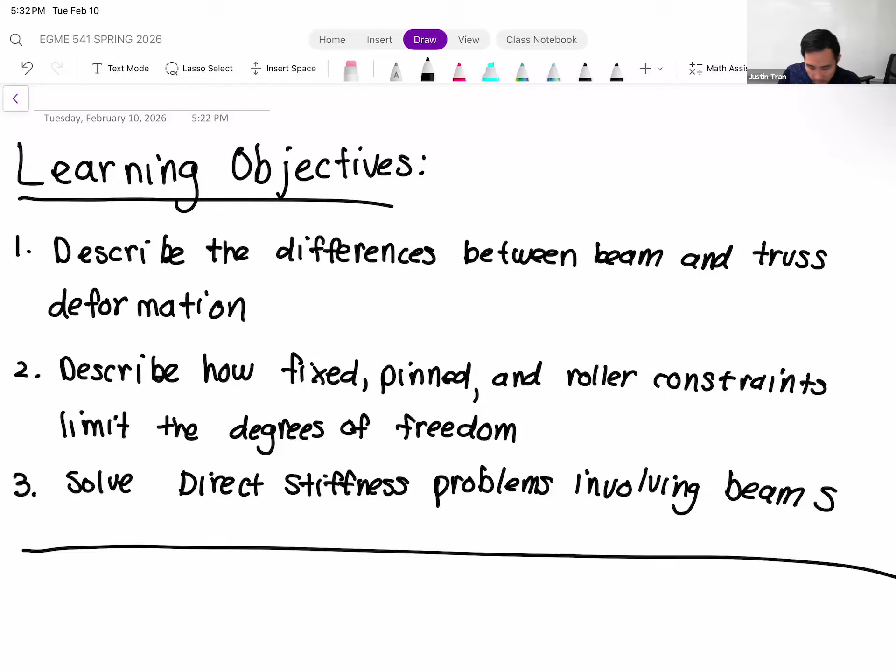Let's talk about beam equations. So far, we've introduced the direct stiffness method as a way to solve for the finite element solution to certain problems that have elements of a certain type. The types of elements we've gone over so far are springs and trusses.

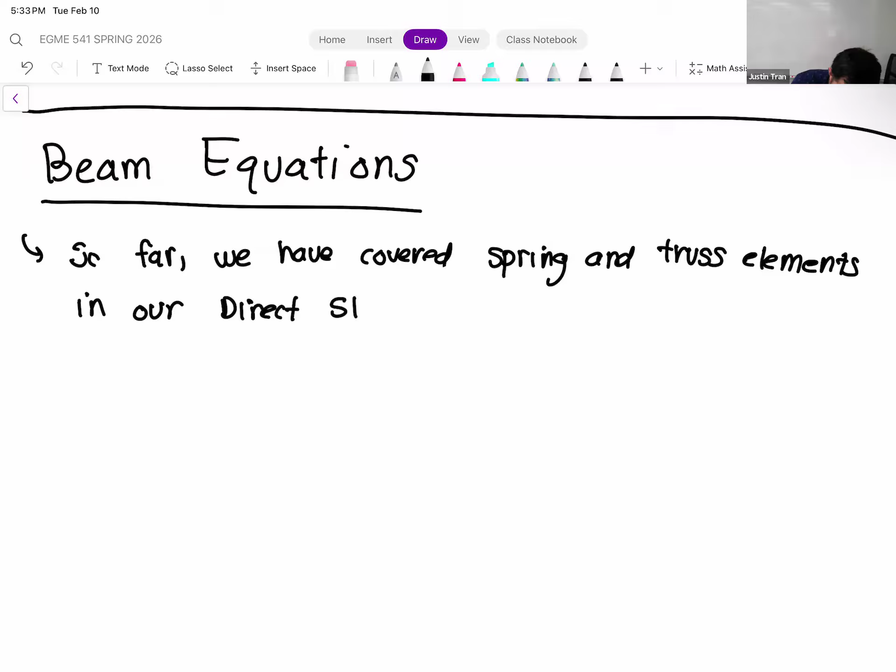It's almost not legitimate to call springs and trusses different elements because they're essentially the same. The only difference is the coefficient out in front. Springs and trusses share the exact same behavior in that we only consider axial deformation for these types of elements. You can draw a truss, you can draw a spring—essentially they're the same. We're only considering forces and deformations that go down the length of the element. So we call this axial deformation.

Other ways we've described this: springs and trusses can only support tension and compression, right? So basically any forces that are along the long axis of the element.

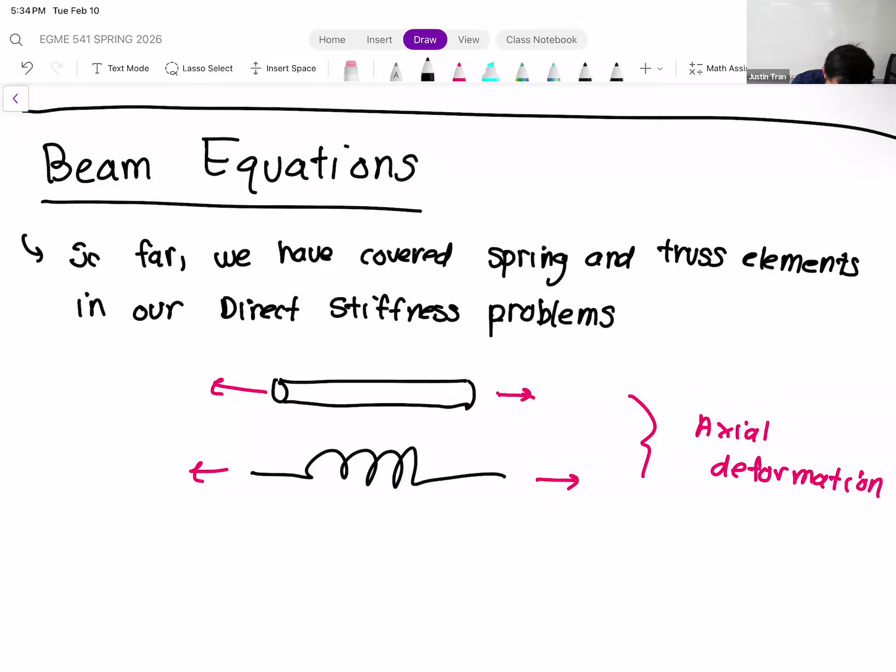Now, this is not the only way that structural elements can deform. We have situations where we have deformation that is perpendicular to the element. That's how we introduce beams. This will be the first time we're looking at situations where our deformation is not going in that particular direction.

Beams in particular support two types of degrees of freedom. The first type is what we call transverse deformation. And the other type is rotations.

Schematically it looks like this: we have an element here, it's a beam. Usually for beams, I'll draw it as a rectangle, and I won't draw the little circle for the cross section. That's a subtle thing, just personally what I do, but that's not a standard convention—just my own personal thing.

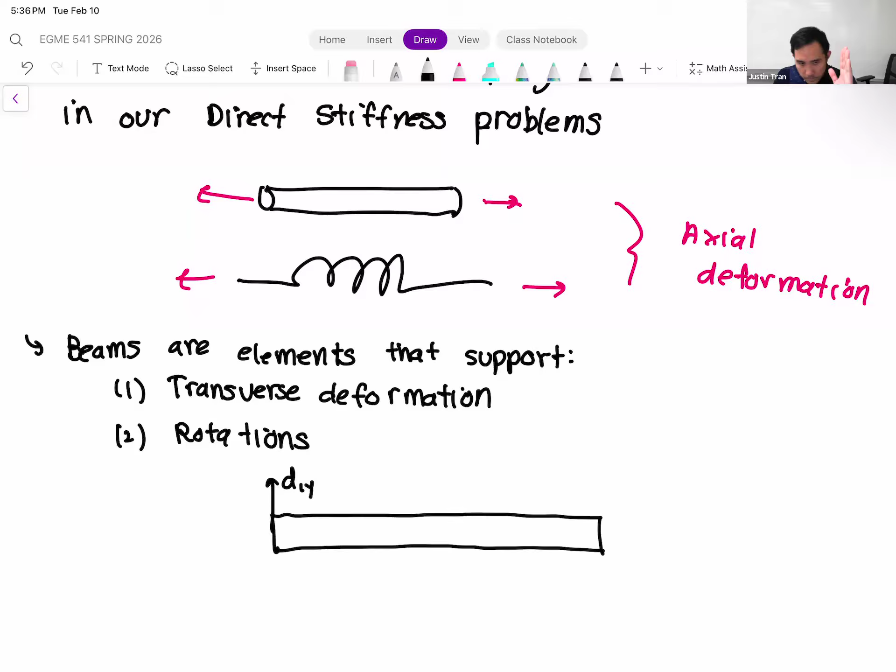Transverse deformations are deformations that are perpendicular to the length of the element. So for transverse deformations, we have D1Y, which is the deformation upwards on this element, and then D2Y, which is the transverse deformation on the other side of the element.

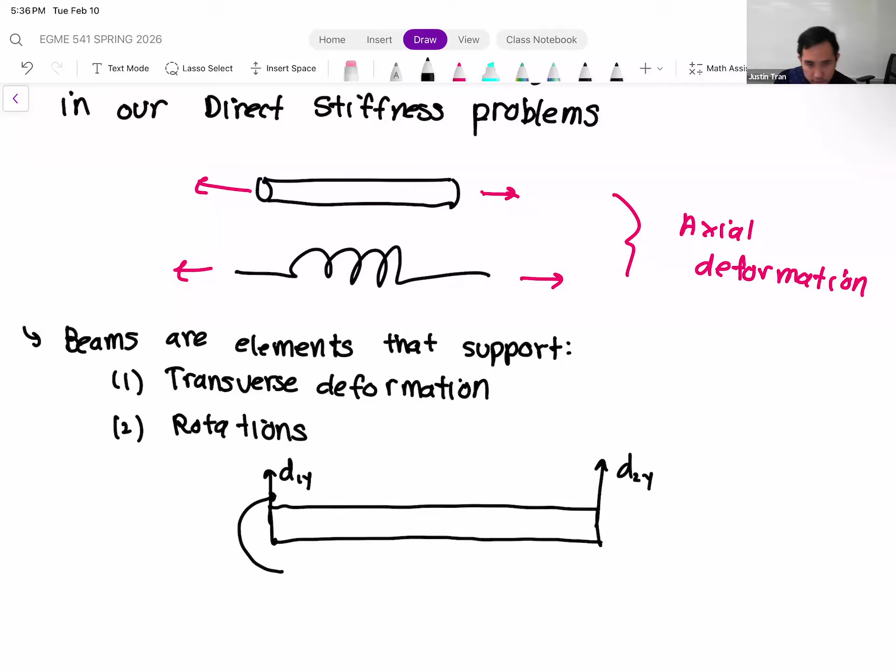The other thing we'll have is rotations. A rotation is basically just a change in orientation. Theta 1, theta 2 will be the rotation angles for our element at the two nodes.

With two types of degrees of freedom, two nodes per element, a beam is always going to have at least 4 degrees of freedom associated with it. I say at least 4 because this is for the plane case where our element is completely flat. But if you look at 2D beam problems where the beam is angled with respect to the horizontal, you have to cover both Cartesian deformation directions: D1x, D1y, D2x, D2y, just like we did with the trusses. But if you're looking at a perfectly flat beam, where the transverse deformations align with the y-axis—that's the standard position—then we have 4 degrees of freedom.

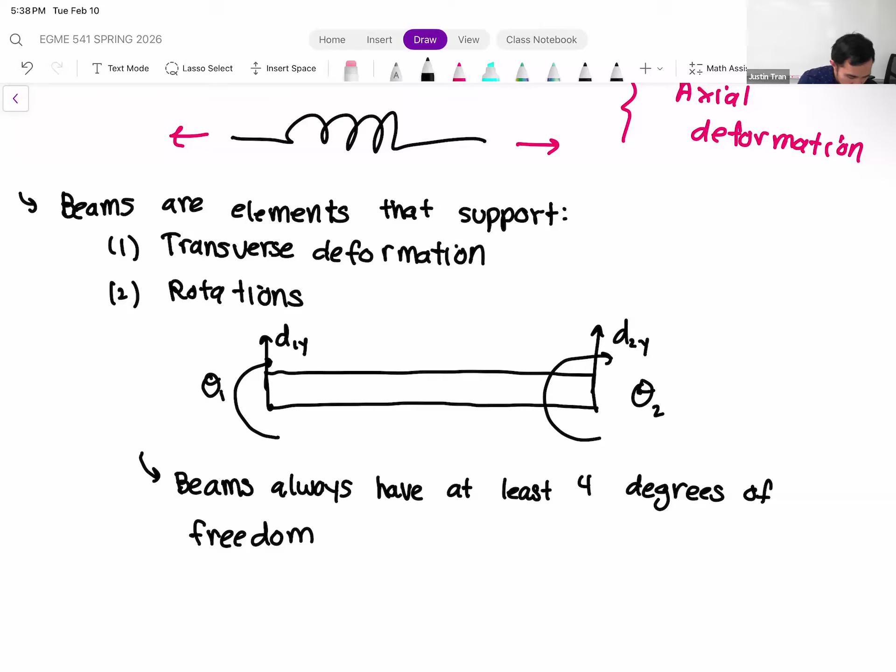So the first step we need to do, just like we saw with trusses and springs, is that we need the element stiffness matrix for beams. We can go through and derive the element stiffness matrix for a beam element, just like we did previously. That was what I had planned to do last Thursday, except we had the fire drill that prevented it, so I'll just put the highlights for the derivation here, but know that all the detail is in the lecture notes.

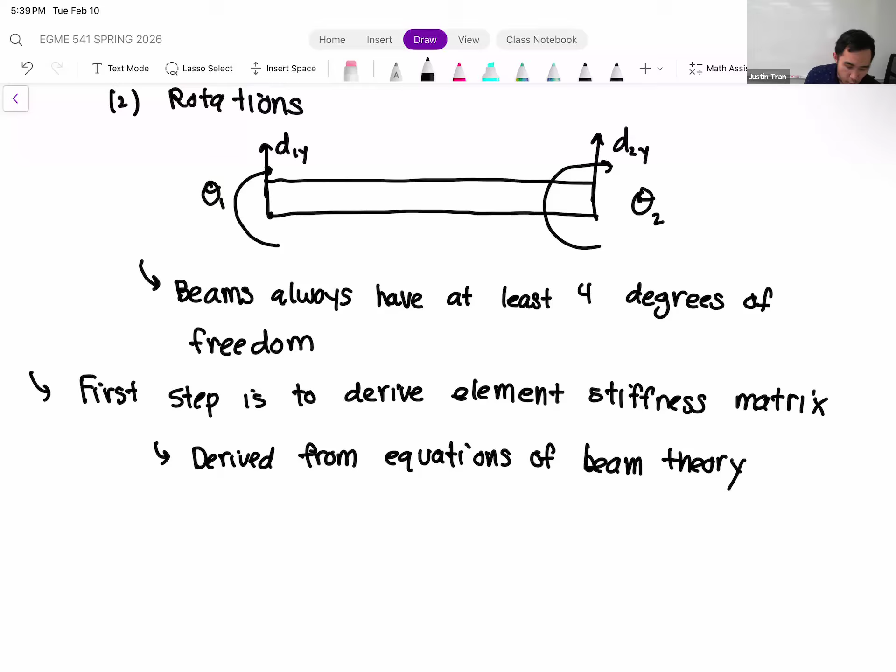Okay, so the derivation follows just as a natural consequence of beam theory. We start with basically an equation that describes the transverse deformation of a beam. That's E times I multiplied by d4y over dx to the fourth power. Right, so that's our beam equation there.

We did apply some assumptions here. We basically assumed that the E and the I are constants, and we also assume that there's no distributed loading, so there's no body force term.

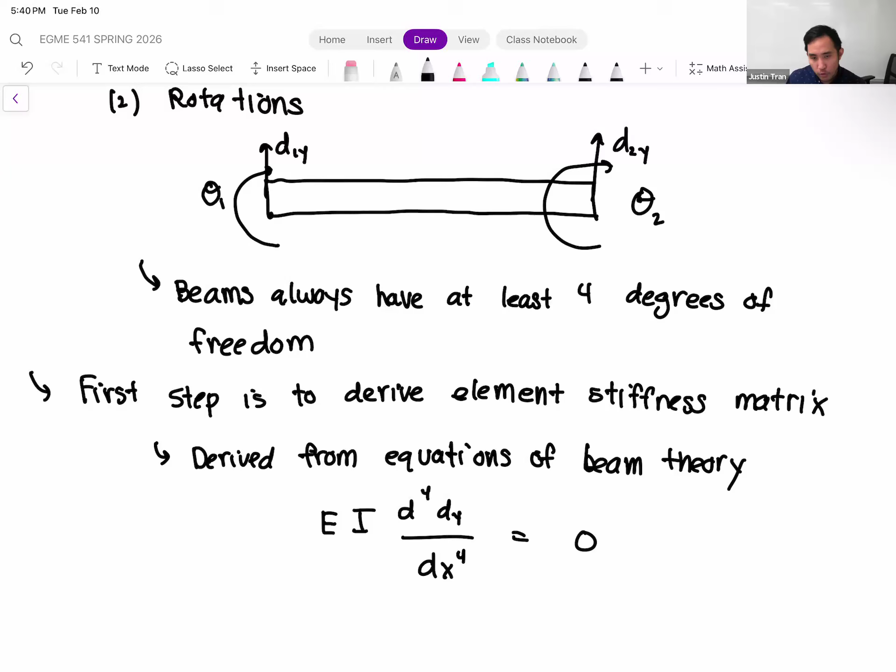So essentially what you do in the derivation is that you take this equation, you apply it to the beam, you set it equal to the nodal forces at each end, and from there you're able to get four linear equations. And those four linear equations form the four rows and columns of our element stiffness matrix.

Again, the details for this derivation are in the notes if you are interested, but I'm just going to go ahead and skip to the end so that we can start doing problems. So the end result is the following.

The first thing you're going to notice is that this element stiffness matrix is quite a bit more complicated than the element stiffness matrices we've done so far. And so these ones you kind of have to be really careful when you're plugging in values.

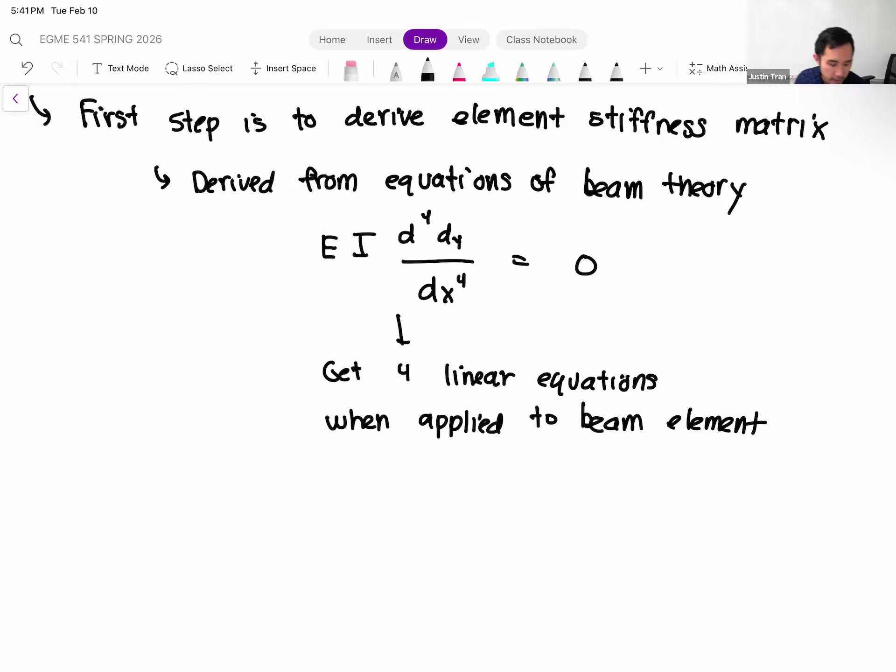All right, let me write out the matrix first, and then we'll define all of the terms. First thing we have is this coefficient out in front, which is E times I divided by L cubed.

And then to this, we're going to multiply by a 4x4 element stiffness matrix, since we have four degrees of freedom. Unfortunately, there's no easy way to do this, so let's just write it out. We have 12, 6L, minus 12, 6L.

One thing that is consistent here is that our element stiffness matrix is symmetric. And so just like we did with our 2D trusses, whenever you write a row, you can write those same values into the column as well. So we know our first column here is going to be 6L, minus 12, 6L.

Next, we have 4L squared, minus 6L, 2L squared, minus 6L, 2L squared. Then the last two rows, we have 12, minus 6L, minus 6L.

Question: do you need to know how to derive the equations for beam theory on the homework? There is a conceptual question about that, in terms of how you derive this, so I would definitely look at that in the notes. But the question is fairly straightforward. You should know, at least conceptually, some of the details of that derivation. That is on the current homework — homework 2 should have a conceptual question, I think it's the last one.

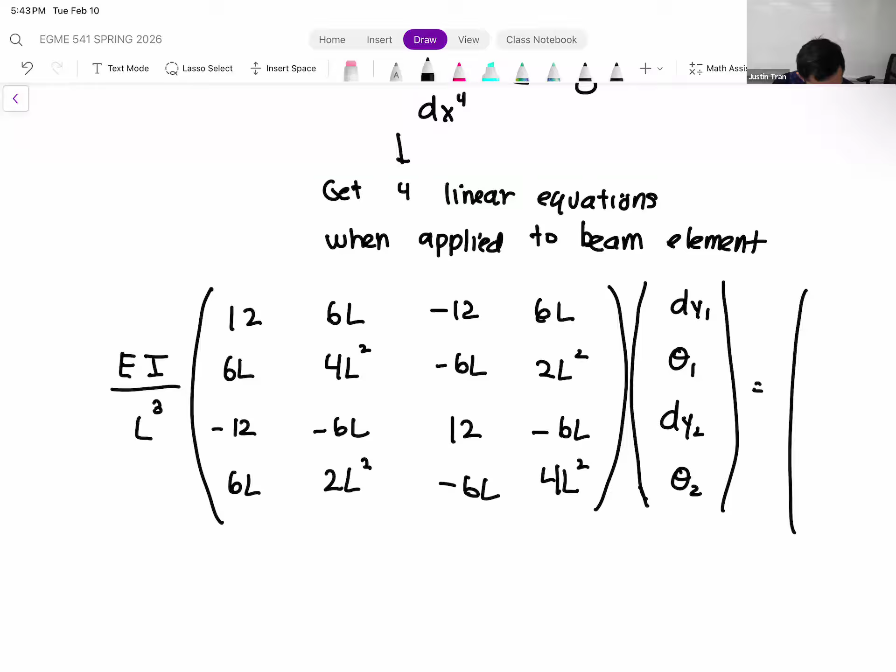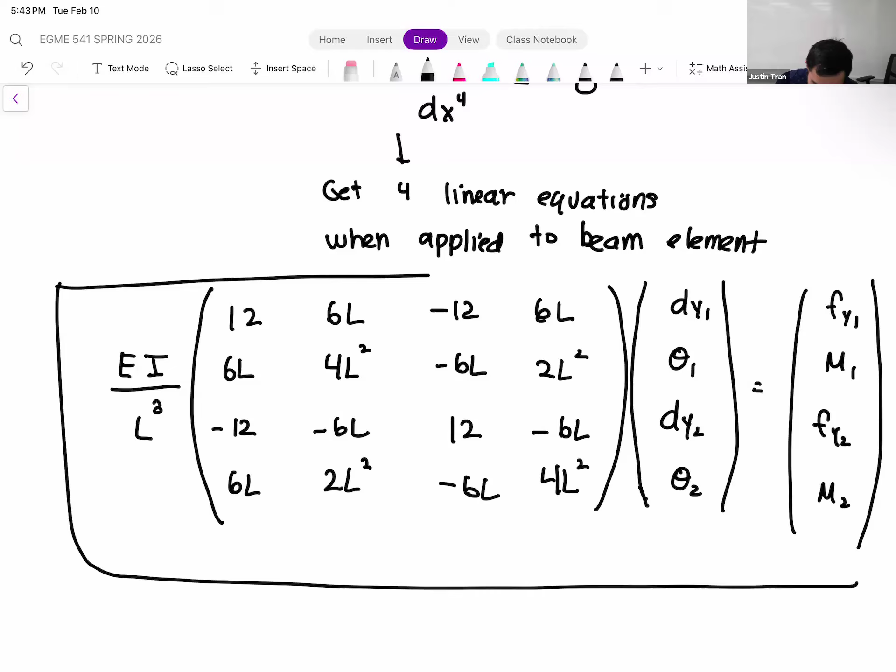Our degrees of freedom here are dy1, theta 1, dy2, theta 2. And this is equal to f y1, m1, f y2, m2. So this is our element stiffness matrix for a beam.

Let's go ahead and define these constants here, since there's quite a bunch of new variables we haven't seen before, along with some we have. E has the same definition as our truss element, so E represents the Young's modulus for this beam. Young's modulus is a property of the material, and it tells you how strong that material is at resisting general deformation. The higher the Young's modulus, the stiffer the material is.

L also has the same definition from our truss element, so L is just the length of the element. Next we have I — this is a new one. I here is the moment of inertia of the beam's cross section. All right, so that's all the material and geometric properties.

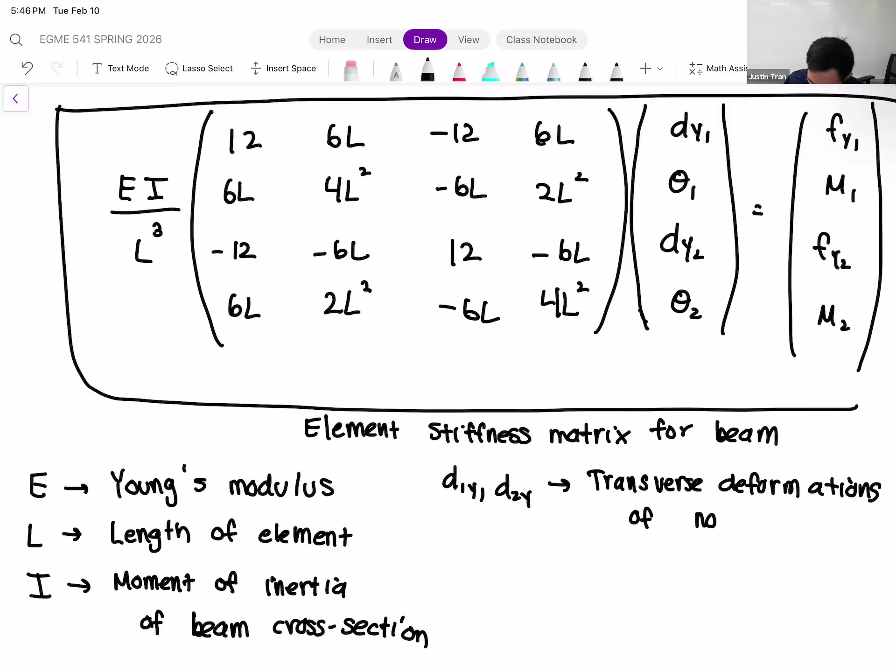Let's define everything in the solution vector and the forcing vector. d1y, d2y, these are the transverse deformations of our two nodes, node 1 and node 2. Next we have theta 1, theta 2, which represent the rotations of our two end nodes.

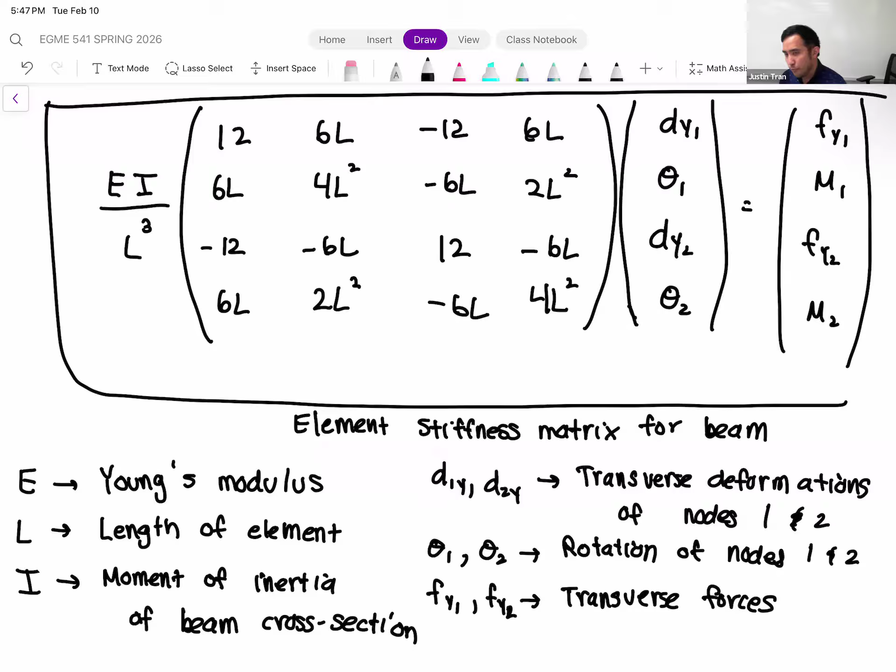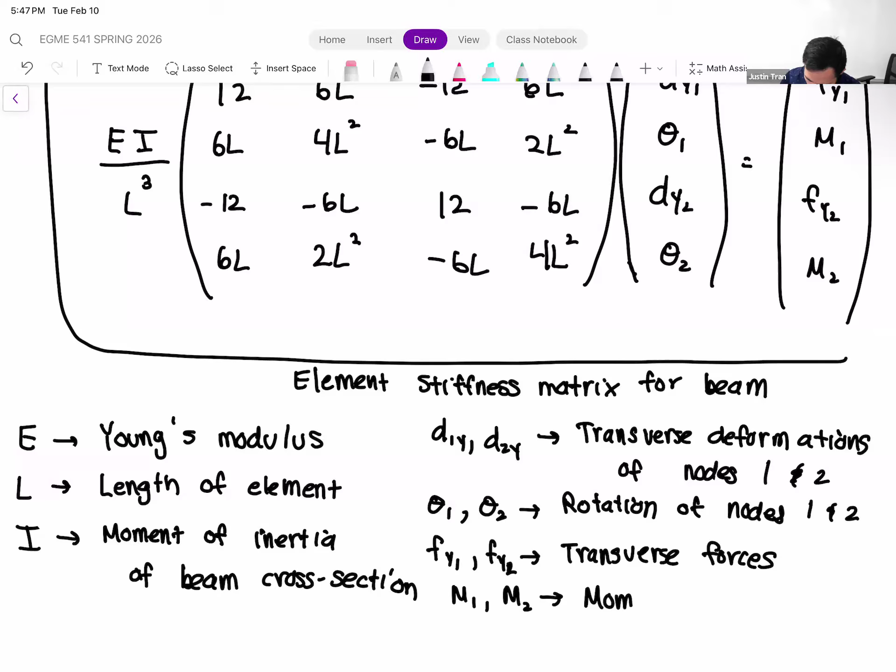Right, and then our forcing vector, let's define those. So Fy1, Fy2, these are the transverse forces that are being applied on the nodes, applied in the direction perpendicular to the element. And then M1, M2, these are moments that are applied on the two nodes, like a torque or something that's going to cause rotation.

So a lot of variables, and I know this matrix here - well, once you use it a few times, you start to see it in your dreams. But before that, it's a lot to memorize. So definitely have this handy. Any questions on this so far?

Okay, so before we jump into an example, let's talk a little more about constraints. Now that we've introduced this idea of a rotational constraint or rotational degree of freedom, there are certain constraints that will restrict that and certain constraints that will not.

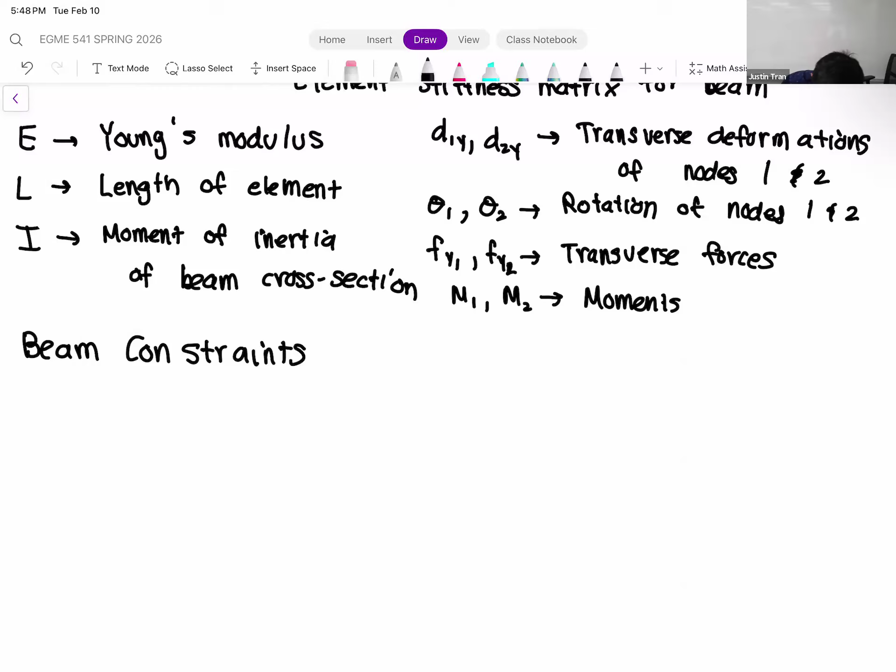Okay, so in general, so far there are three possible degrees of freedom that can occur at any given node. The first one that we've been using up until this point is axial deformation, which usually, for a coordinate system local to the element, is in the x direction. So dx - I guess technically that's dx hat.

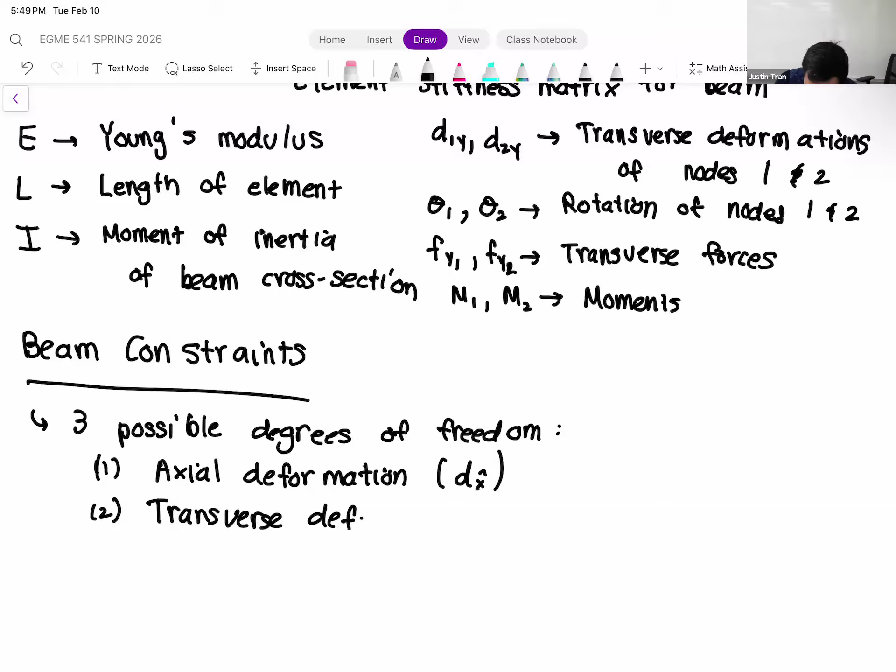Next, we have transverse deformation, so that's dy hat. That's the new one - that's the one that we've just learned. And then the third is, of course, rotations.

Interestingly, rotations are kind of independent of the coordinate system, because rotations are unitless. So it's not something that depends on the coordinate system or any degree of measurement. So rotations are just going to be theta.

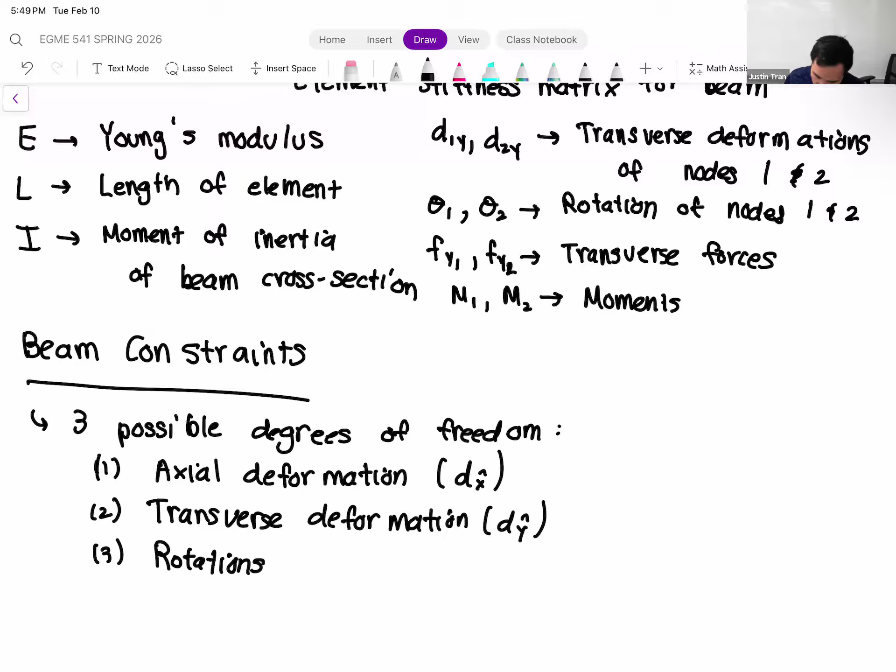Now, we can apply different types of constraints to restrain these degrees of freedom. In general, there are three types of constraints that we can use.

So the first type of constraint that we have is what's called a fixed support. A fixed support is the strongest type of constraint you can have. In a fixed support, all of our degrees of freedom are going to be constrained.

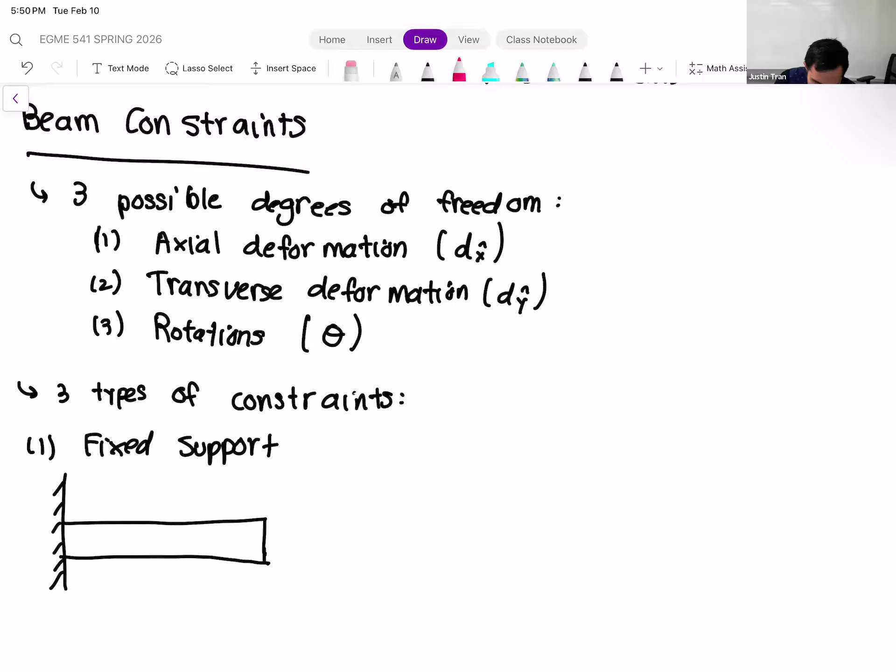Schematically, it looks something like this: you have some wall, and a beam coming out of it. The fact that this beam is basically attached to this wall, that is our fixed support. And so under a fixed support, dx hat, our axial deformation, is going to be 0. Our transverse deformation is going to be 0. And theta, our rotation, is also going to be 0. So a fixed support constrains all 3 degrees of freedom.

All right, so next one we have is a pin support. This is one that we've mostly been using just because we haven't considered rotations up until this point. For a pin support, it usually looks something like this: you have an element and basically a little pin there that's pinning it, and then the pin itself is fixed to the ground.

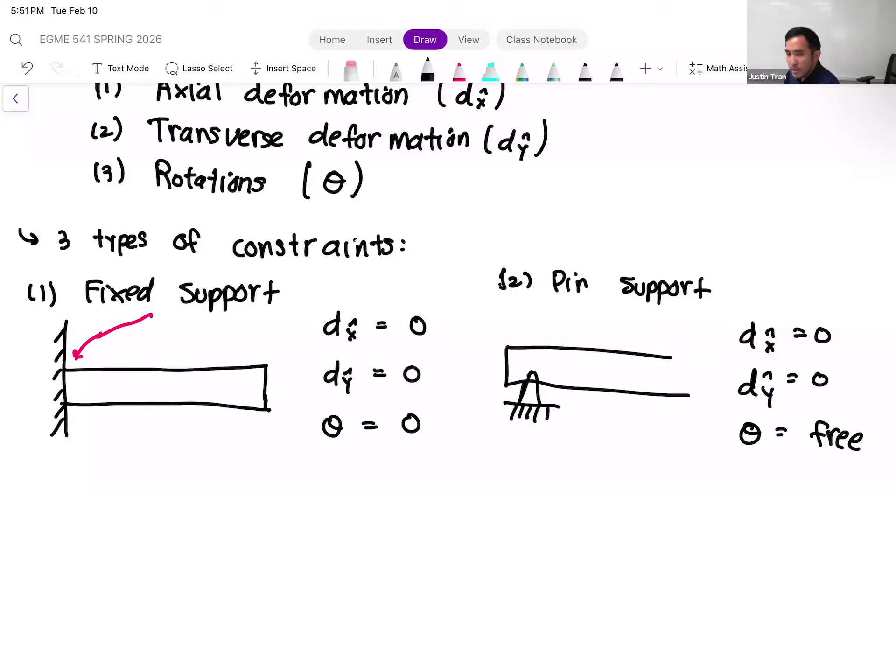Now under a pin support, both of the deformation components will be 0. So dx hat is equal to 0, dy hat is equal to 0. But our rotation is going to be free, right? Because it's a pin, what we're saying is that the element there, even though it can't translate, can't move from that spot, it can at least change orientation, change direction. So our theta is going to be free.

And then finally, we have a roller support. This is one we just introduced last time. So under a roller support, we have basically a pin that's attached to the element that's on wheels. The roller support only constrains deformation that's perpendicular to the ground.

So if we say that the x direction is along the length of the element, that means dx hat - there's no restrictions on this just because it can roll in that direction. So we say dx hat is free. dy hat is 0, so the transverse deformation is constrained because of the roller. And then our rotation is free as well, because the roller is kind of just like a twist on the pin support - the element is free to rotate and change angle at the roller support.

All right, so starting with these beam problems, you'll see a combination of these types of constraints in your problems. So when you go to apply the boundary conditions to your global linear system, you want to make sure that you don't accidentally knock out a row that's not supposed to be knocked out. Definitely be aware of the type of constraints you're using and what effect that has on your matrix.

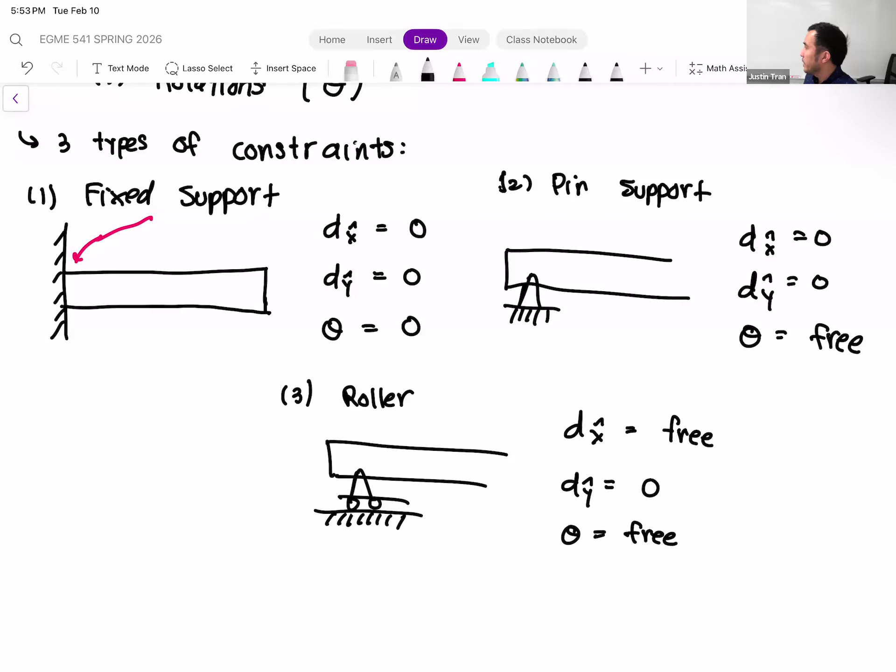All right, any questions on this?

All right, so besides that, that's all the new information about beams. We have our new element stiffness matrix, and these new constraints. From here, solving these FEA problems with beams is the exact same process as before. The only difference is that we have a different element stiffness matrix. All right, let's do a quick example.

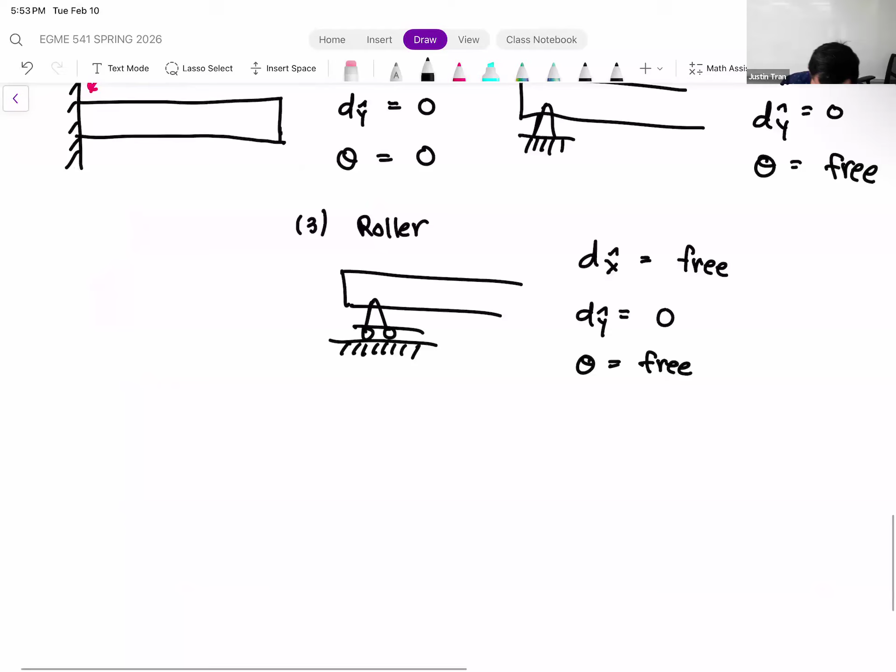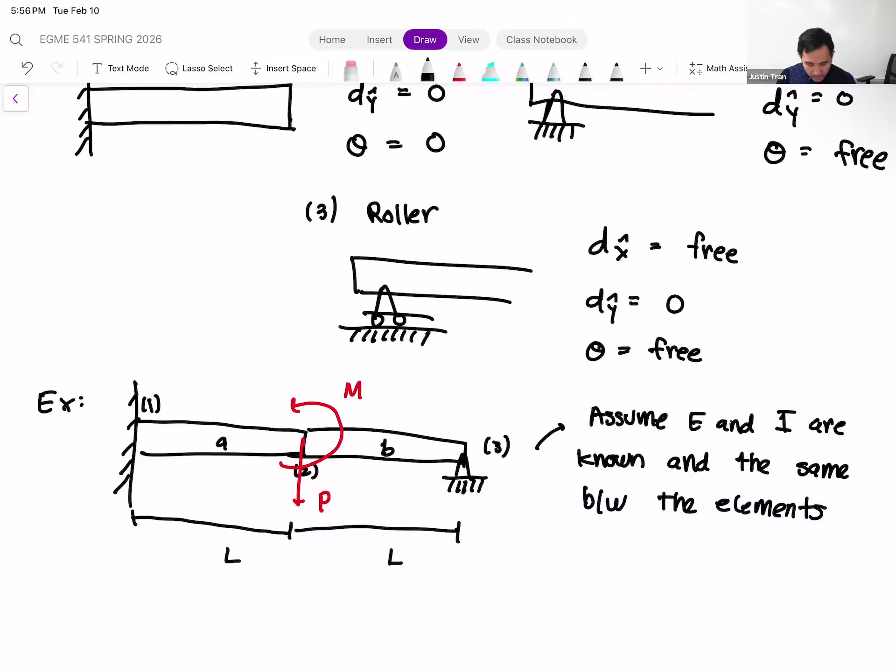And so knowing that elements A and B here are beams, all we can do in this problem, since we don't have any numbers, is set up the global linear system.

All right, so fairly standard finite element problem. We're not given any numbers, so we're just going to do the whole thing with symbols. We're going to go fairly quickly. Any questions just on the setup of the problem? All right, let's go ahead and get started.

So just like any finite element problem, we are going to start with the element stiffness matrices. Luckily elements A and B are exactly the same, or at least they have the same properties, the same length, the same Young's modulus, the same I. And so numerically, the two element stiffness matrices will be the same. But remember, each element stiffness matrix is connected to different nodes, and we want to make sure we note that as well.

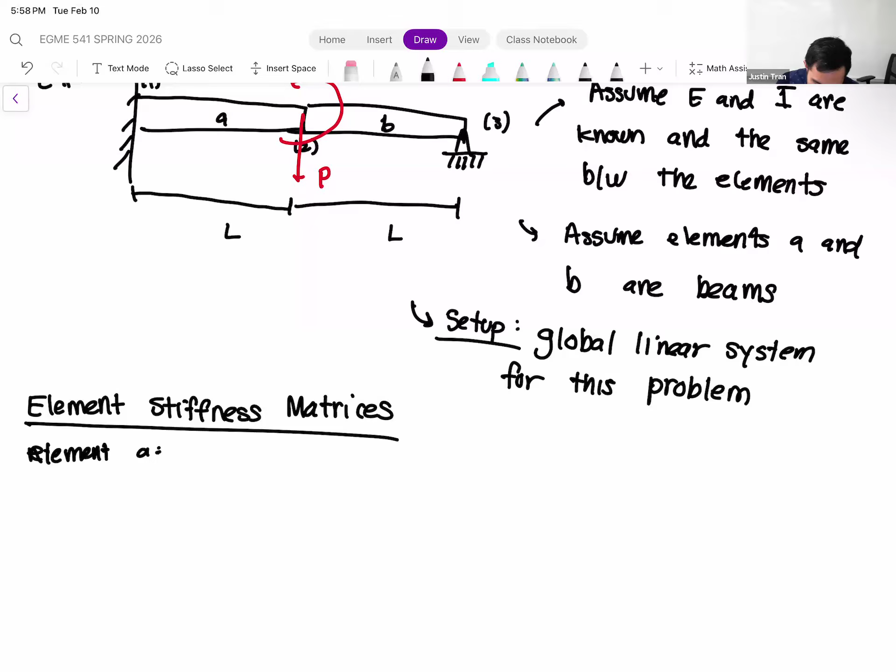Let's look at element A. So we have just a generic beam, oriented the right way, and we know all the properties. Let's go ahead and write out the element stiffness matrix: that's E times I divided by L cubed, multiplied by the matrix with rows 12, 6L, minus 12, 6L; 6L, 4L squared, minus 6L, 2L squared; minus 12, minus 6L, 12, minus 6L; 6L, 2L squared, minus 6L, 4L squared.

Element A we know is connected to nodes 1 and 2, so we're going to factor that into our solution vector here: d1y, theta 1, d2y, theta 2. It's a little anticlimactic since we don't have any numbers to plug in, but in some ways this is good for our first problem, just to see the process.

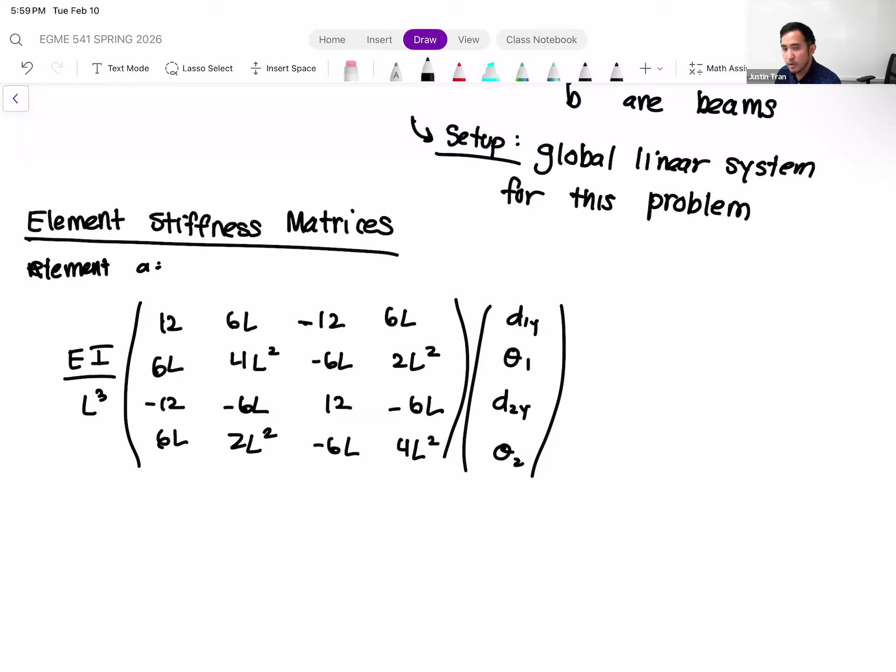Okay, so let's do the same thing for element B. Element B will have the exact same matrix. The only difference is that element B is connected to nodes 2 and 3 as opposed to 1 and 2.

All right, I'm just going to write this one fairly quickly. So we have 12, 6L, minus 12, 6L; 6L, 4L squared, minus 6L, 2L squared; minus 12, minus 6L, 12, minus 6L; 6L, 2L squared, minus 6L, 4L squared. And element B we know is connected to nodes 2 and 3, so let's make note of that as well: it's going to be D2Y, theta 2, D3Y, theta 3.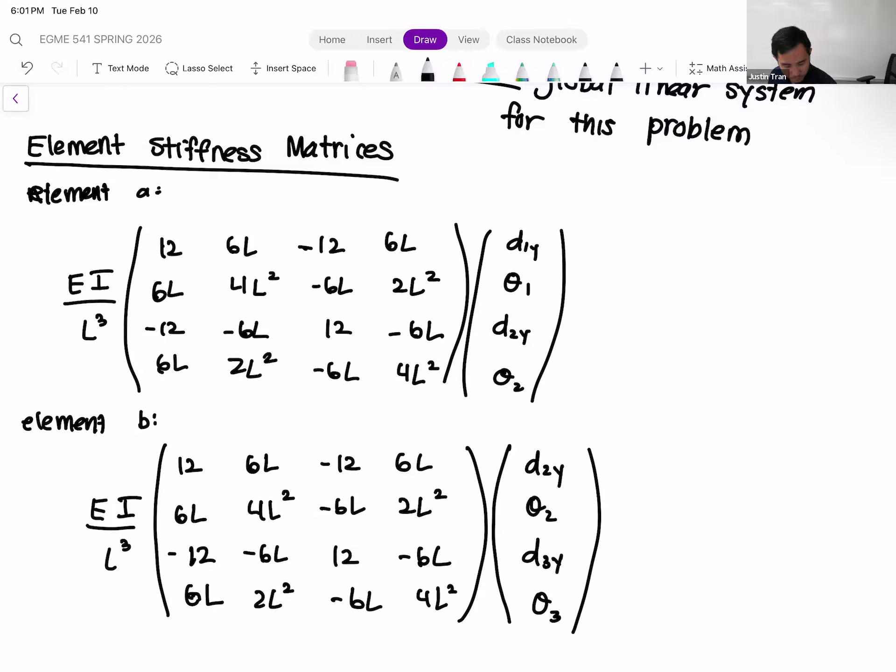Okay, so fairly straightforward. All we've done is taken our formula for the element stiffness matrix and just moved it down here, since we don't have any numbers just yet. Our next example will have numbers, but for now we're just doing one without the numbers. Any questions on this so far?

Okay, so now that we have our element stiffness matrices, we are ready to assemble. So let's go ahead and do that.

So for assembly, we have EI over L cubed. Since both elements are the same, I'm just going to factor out that same quantity just so we don't have to worry about it.

Our global linear system here will be 6 by 6. Let me go ahead and write the columns in: D1Y, theta 1, D2Y, theta 2, D3Y, theta 3. And then rows, we have D1Y, theta 1, D2Y, theta 2, D3Y, theta 3. And then out here we have F1Y, M1, F2Y, M2, F3Y, M3.

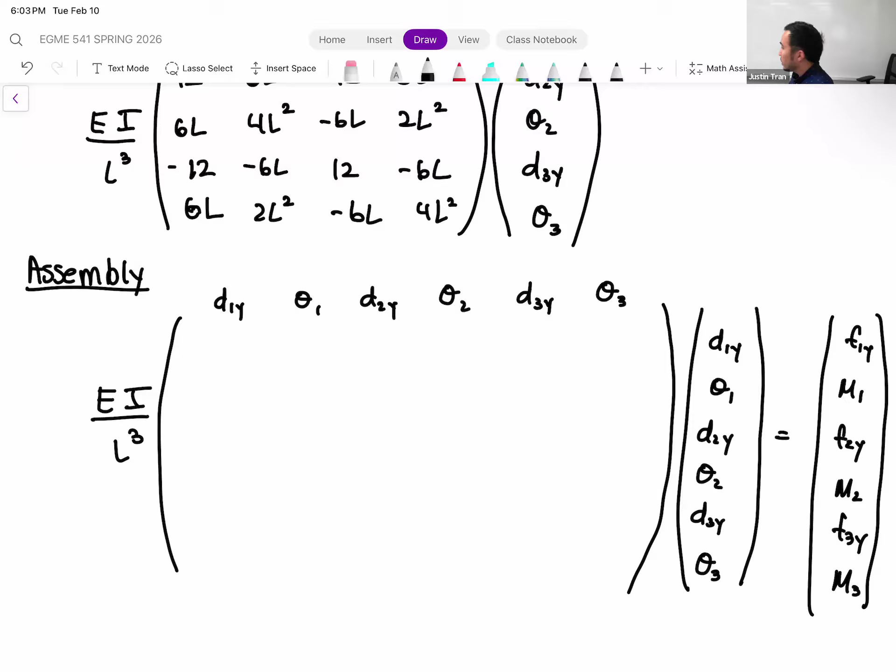So now that we have our global linear system set up, we can go ahead and start plugging in our element stiffness matrices. Luckily, our element stiffness matrices here are pretty straightforward, so they all are just using consecutive nodes here.

Element A will be nodes 1 and 2. So element A is going to be this region right here. That's element A, nodes 1 and 2.

And then element B we know is nodes 2 and 3. Let's go ahead and block those off. That'll be that region right there.

First thing we'll do is, any regions that do not have a box around them, we'll go ahead and put zeros there. So we're going to have zeros in the rows and columns where nodes 1 and 3 interact, that's the D1Y, D3Y row, D1Y, theta 3 row. That makes sense because there's no element connecting nodes 1 and 3, so there's no way for those two nodes to interact, and it makes sense that we have 0 there.

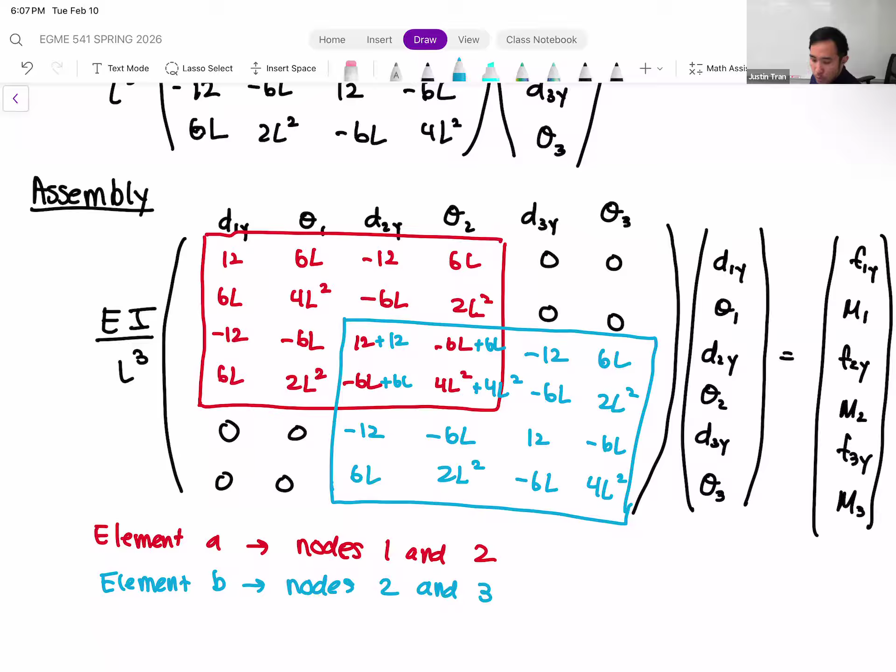In two cases, you see that we have an increase in the magnitude of the entries there, so those are our two diagonal terms. We have a 12 plus 12, which is going to be equal to 24. And then in the bottom right, we have a 4L squared plus 4L squared, that's going to combine to 8L squared.

And then in the off diagonal entries, we have minus 6L plus 6L in both of those, and so that's going to cancel out and give us zeros on that. Okay, so that is our assembly, same process that we've gone over, just with different element types now. Any questions on how we've assembled this matrix here?

Okay, and so the last step we have here is we're going to apply the boundary conditions. This part is kind of the new part, and that's the whole reason we're going through this example. Let's go back up to our problem and make note of the types of boundary conditions we have on our two nodes. If we look at the constraints first...

We see that node 1 is fixed to the wall. Remember what a fixed support means: a fixed support essentially means that all degrees of freedom at that node are going to be knocked out. So that means that at node 1, D1Y is equal to 0, theta 1 is equal to 0.

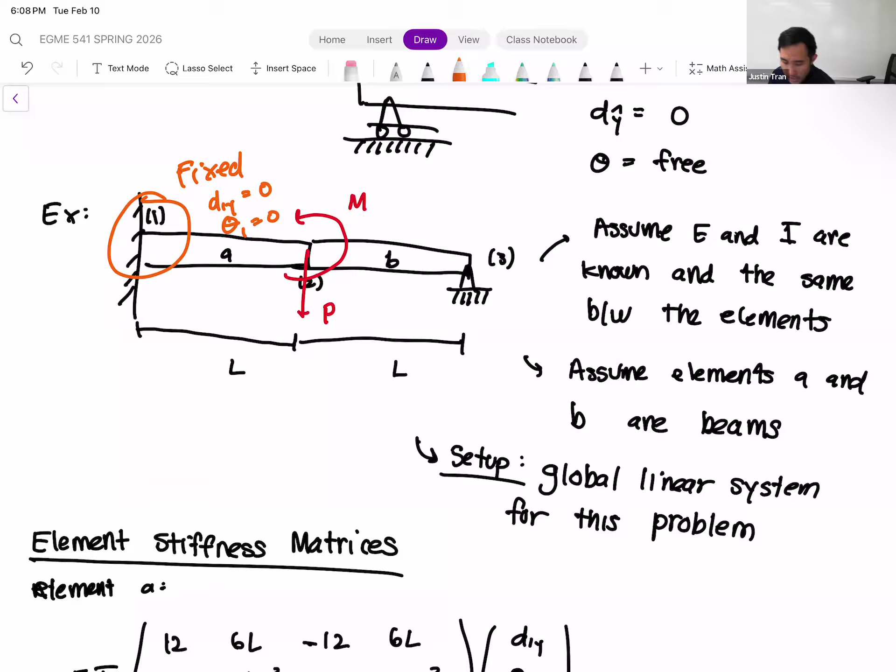On the rightmost node, we have a pin support. That means d3y is equal to 0. But since it's a pin, we know that the rotation at node 3 is going to be free. So we're not going to constrain theta 3, we're only going to constrain d3y.

So let's go back to our matrix and see that happen. First we're going to apply the fixed support on node 1. That's going to knock out the first two rows. Just like we always do with Dirichlet type boundary conditions, we substitute those rows entirely with zeros, with the exception of the diagonal term, where we put a 1. And in the forcing vector, we put zeros on those rows as well. Effectively, we're putting in the equations d1y equal to 0 and theta 1 equal to 0 from those first two rows.

And then the other constraint we're applying is on node 3, on d3y. Let's go ahead and do the same thing: eliminate that row, put zeros in the row except for the diagonal entry where we put a 1, and set f3y equal to 0 as well.

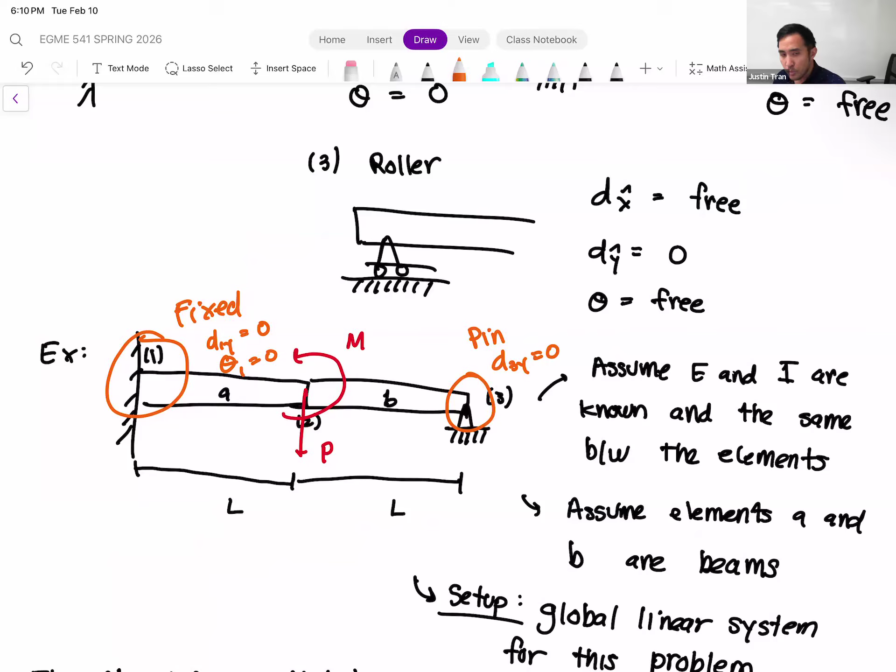The last two boundary conditions we're going to apply are our two loads. Both loads in this problem are applied at node 2: we have a downward force P applied at node 2, and a counterclockwise moment applied on node 2 as well. You have to be careful about the signs of these forces. First, the force being applied on node 2 is in the downward direction, so we apply that with a minus P in the row for d2y. We leave the matrix alone and only apply the force in the forcing vector. Then we have the force applied on the theta 2 degree of freedom, which is our moment m. Since it's counterclockwise, following the right-hand rule, counterclockwise is positive, so we have a positive m on that row.

Then the last thing we have to set is M3. We don't have any boundary conditions applied on the rotational component of node 3, so we can just set M3 equal to 0. But we leave the matrix alone on theta 3 since it's not constrained.

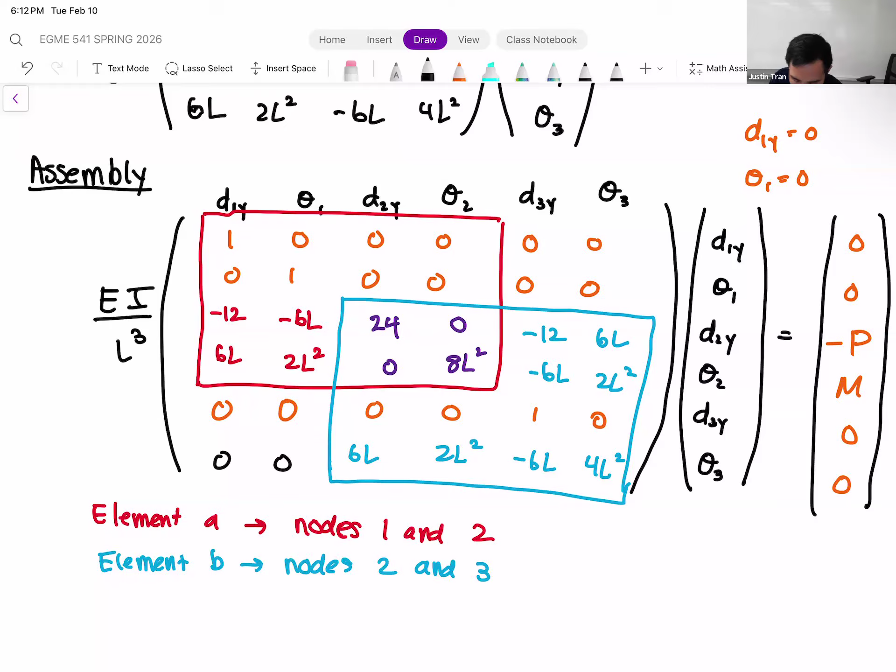With that, we are all set up, and this is our global linear system. If you actually wanted to solve for the deformations and rotations at the nodes, you'd have to plug in numbers and solve this system.

But you can see with beam elements, nothing really changes about our methodology. We're still using the exact same direct stiffness method, we're going to kind of beat it till it's a dead horse and then beat it some more. The only thing that's different here is the element stiffness matrices, which are of course different. Any questions on this example?

So that's our first example using beam elements. Before we move on to the next example, I want to talk about one other unique thing we can do, which is we can compute reaction forces on our beam elements.

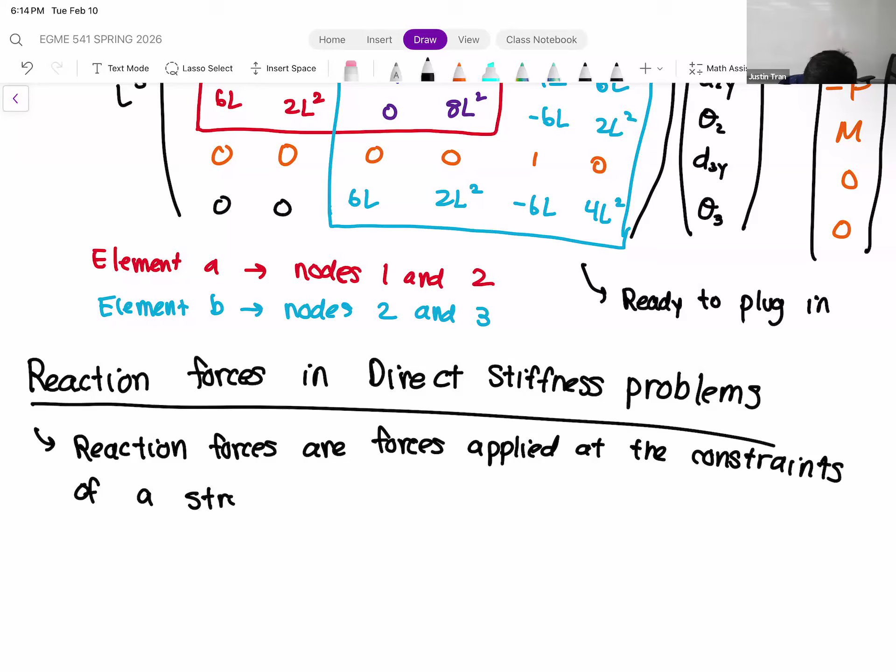So oftentimes, we don't explicitly compute the reaction forces. We basically just say that the constraints are doing its thing. But in reality, all forces have to be balanced out in order for a system to be in equilibrium. So what we don't see is that whenever you have a constraint, there is an implicit force being applied from the constraint onto the structure that's maintaining equilibrium.

So in other words, it's like this: let's say we have a simple cantilever beam, and we apply a load at the end of the beam. If we look at a problem like this, we can automatically say that this structure is in equilibrium because we have that fixed support on the left.

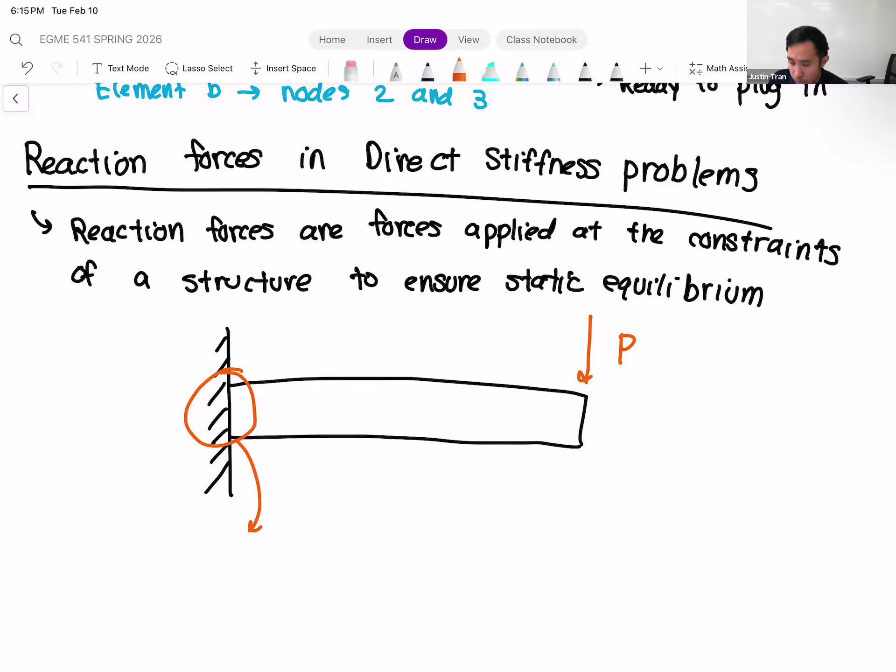But in reality, what that fixed support is actually doing is applying what's called a reaction force. So if we isolate this beam from the support, we basically just look at the beam by itself, and we have our force being applied at the end.

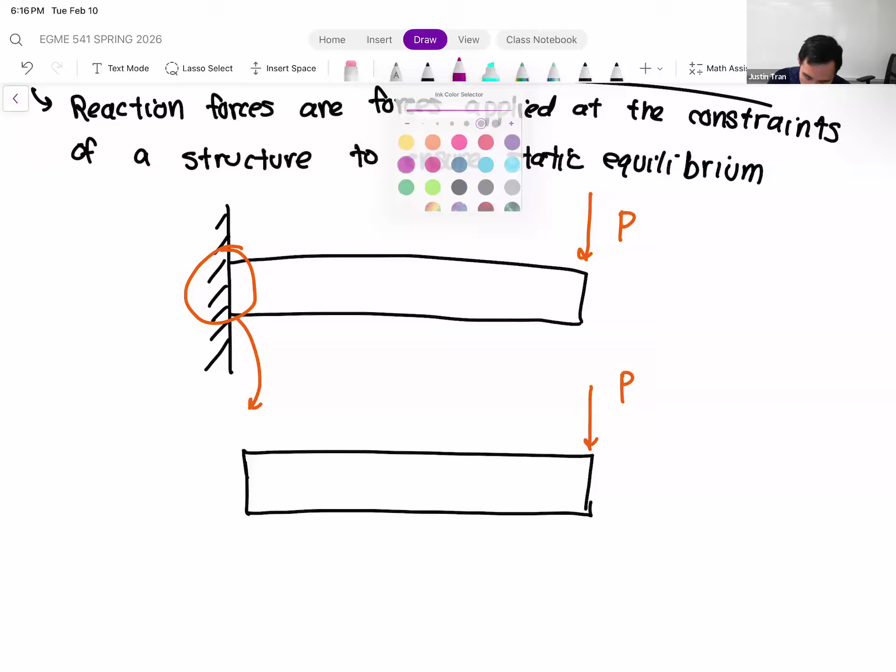If you have a structure in static equilibrium, it is not moving, which always means that all the forces being applied onto your structure, onto your system, have to cancel out. That means this P must have an equal and opposite reaction force in the structure in order to maintain equilibrium. That force is applied at the location of the constraint.

So we can define some Fy that is going to be that reaction force. And for beams too, we also can have a reaction moment, or reaction torque.

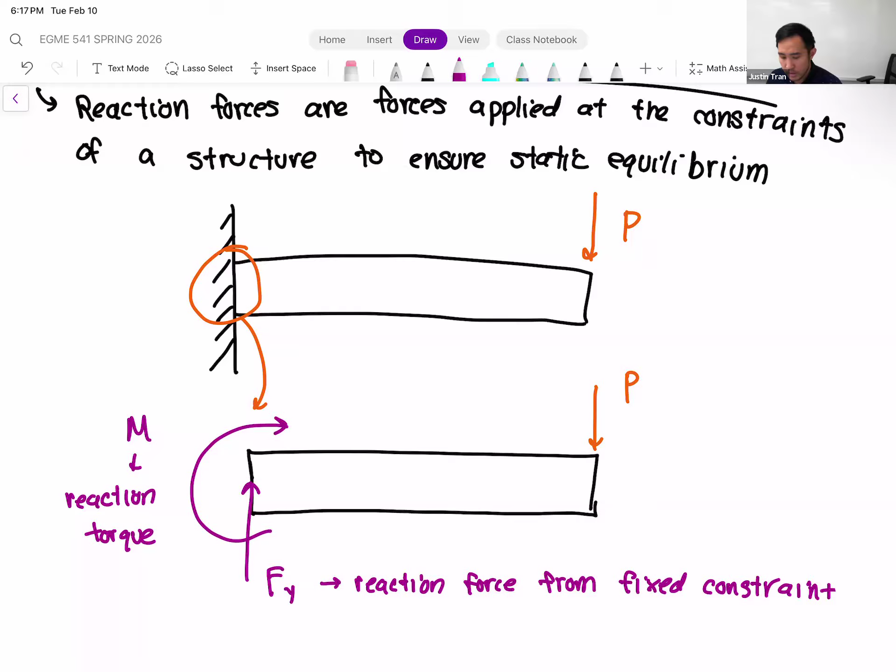Because now that we're looking at beams and we can have forces that are perpendicular, we have to account for bending as well. So in order to make sure the beam does not rotate or do anything weird, there also has to be a reaction torque. The rule of thumb is that if your support or constraint is limiting a certain degree of freedom, there's usually going to be a reaction force developed in that direction.

So why is this useful? Why would you want to compute reaction forces? Well, in reality, if you have some kind of engineering structure, the most common points of failure are often going to be where the constraints are. Because usually where you have the constraints, that's where you have some kind of bolt, welded joint, or rivets.

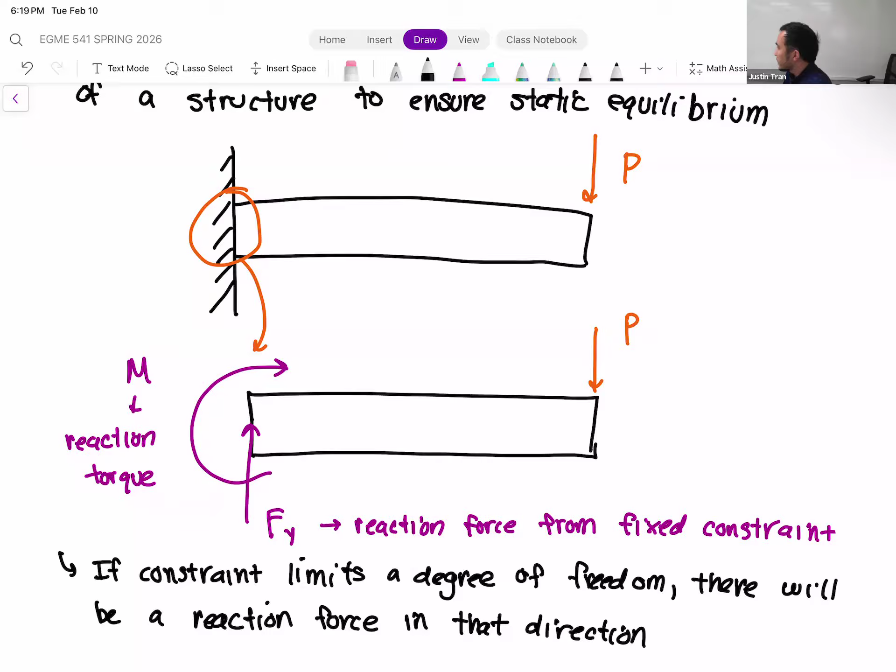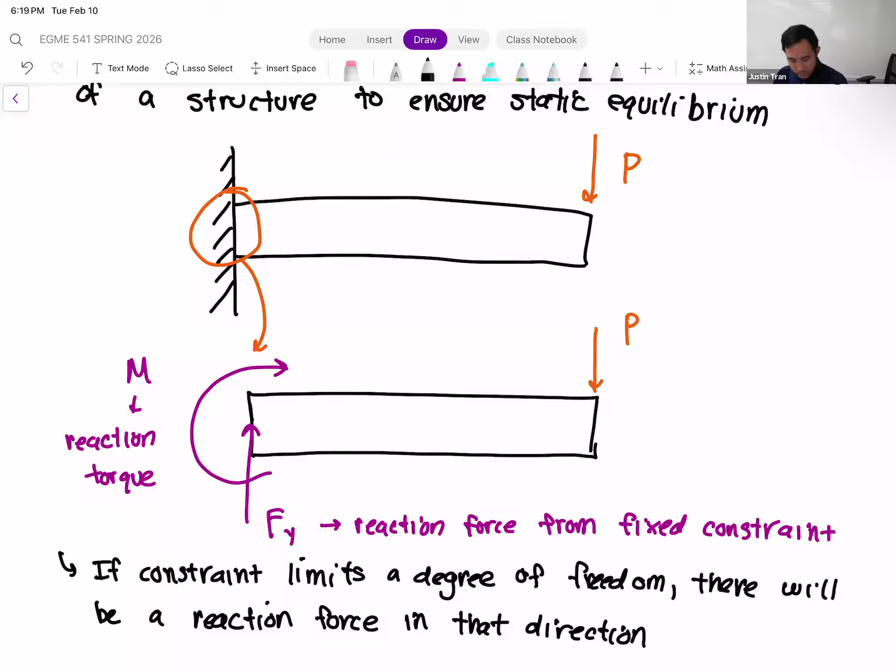And so those are usually the most common places of failure because that's where most forces tend to concentrate. Whenever you do an FEA analysis, it's often useful to compute these reaction forces just so you can see which structures, bolts, rivets, or constraints are most in danger of failing. So how do you actually compute this? Reaction forces are what I classify as a post-processing step, something you compute after you compute your finite element solution.

Before you can compute reaction forces, you need to compute the nodal deformations first. This is similar to last week when we talked about trusses: if you wanted to compute the stress in a truss bar, the first thing you need to do is compute the nodal deformations. Reaction forces work exactly the same way.

So the way to actually compute the reaction forces is that once you have the nodal deformations, you're going to multiply your vector of nodal deformations.

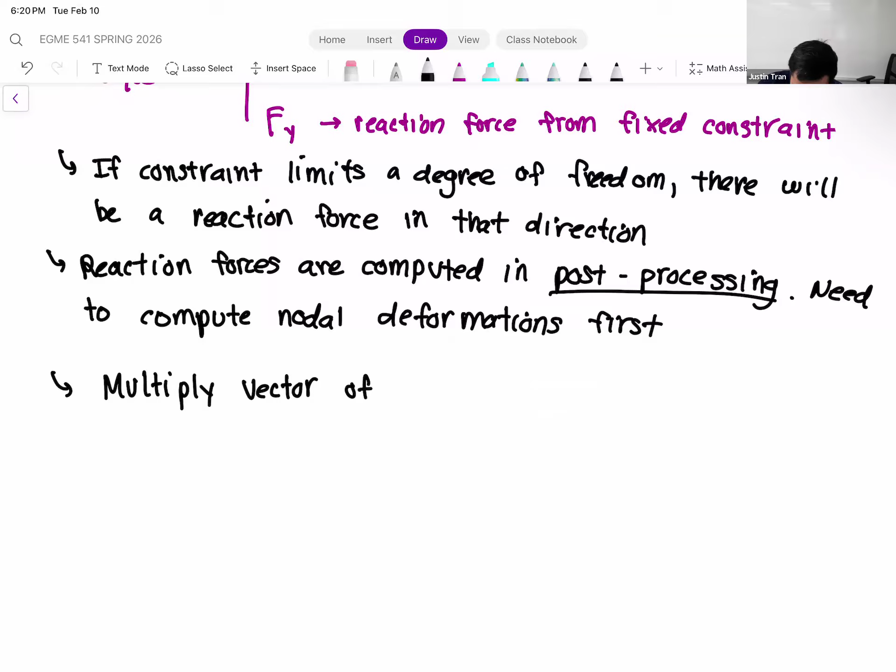It's actually very convenient to do in MATLAB because you solve your system and get a vector of deformations like that. To compute reaction forces, you just take that vector and multiply it by your global linear system. But you have to multiply by the global linear system that you found before you applied boundary conditions.

So that means if you do want to compute reaction forces, you have to have a little bit of foresight, and you can't just write over your matrix when applying boundary conditions out of laziness. If you know you need reaction forces, you want to save that matrix from before you applied boundary conditions, so you can multiply it out.

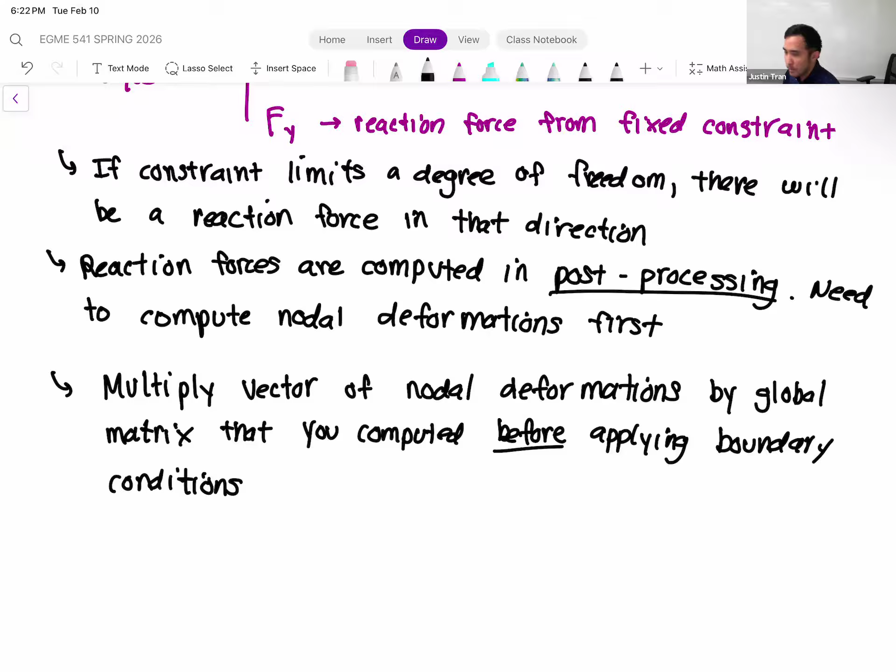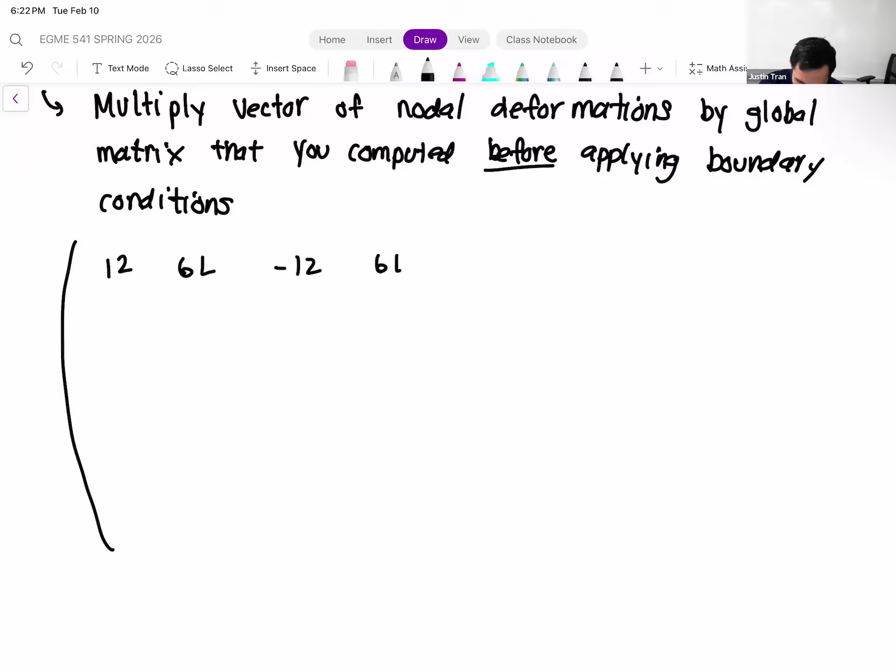For example, in the previous problem, we had this matrix before we applied the boundary conditions. So to get the reaction forces, you're going to take that matrix: 12, 6L, minus 12, 6L, 0, 0, 6L, 4L squared, and so on. This is from the last example.

I'm not going to write out every single entry because that would take forever. But notice how I started this matrix - this is before we applied our fixed constraint, so you should have a symmetric matrix. There's no rows that have been taken out. You're going to multiply that by your vector of nodal deformation: d1y, theta 1, d2y, theta 2, d3y, theta 3. This is your vector of nodal deformations from the direct stiffness problem.

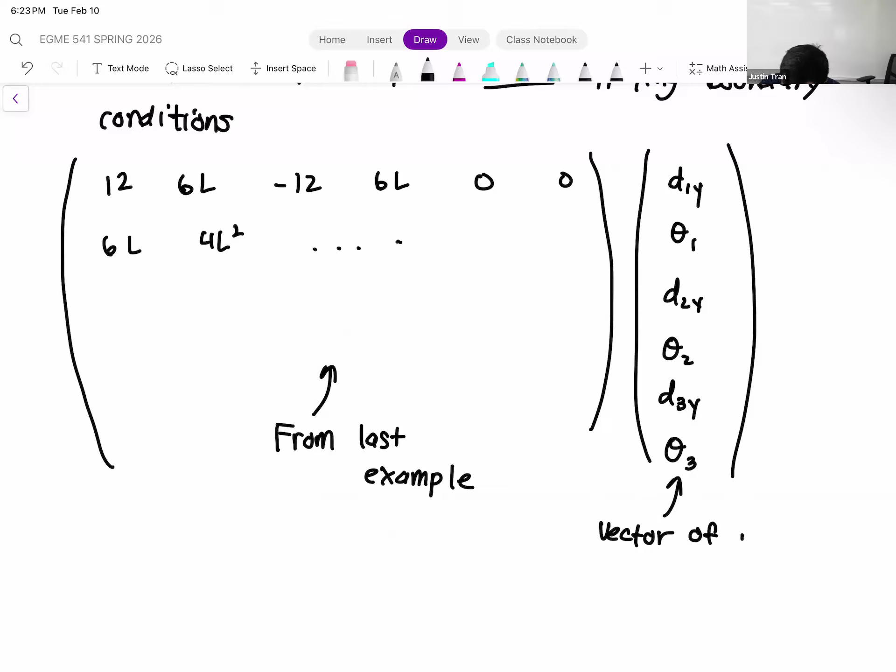By doing that, you're going to get a vector. You're basically multiplying a matrix by a vector, so the solution is a vector. This vector will tell you all of the reaction forces at those nodes.

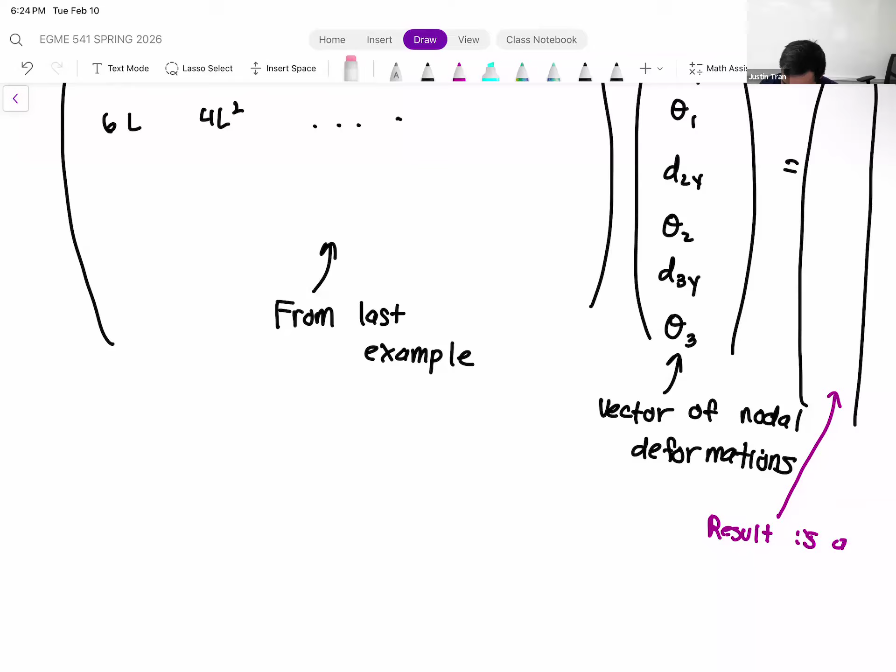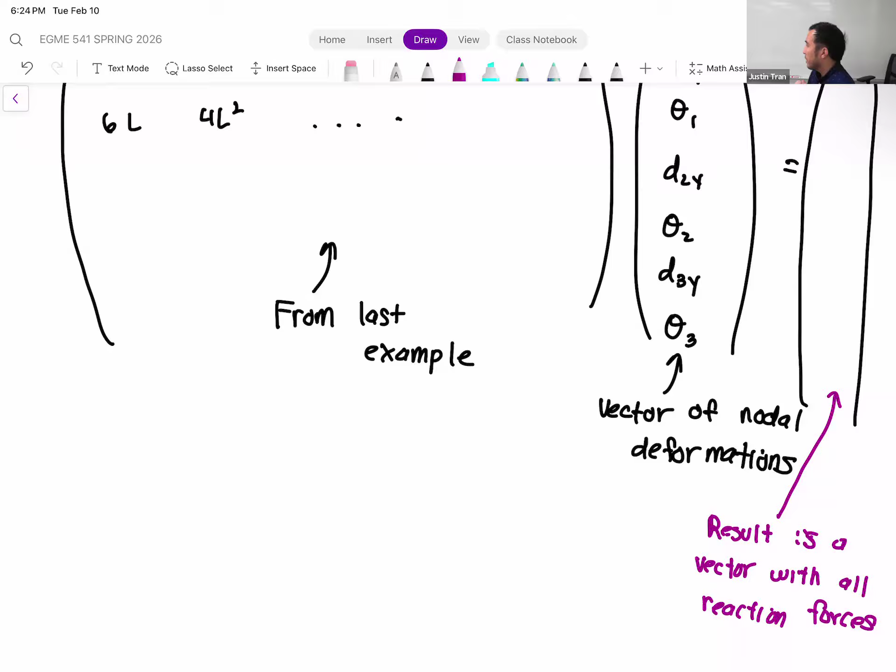All right, so we'll do this on the next example, but I wanted to go over it first just so you can see what we have planned. Any questions on this before we jump to another example? We only have about 20 minutes left, so I don't think I'll be able to finish the next example - we'll finish it up on Thursday. But let's go ahead and start.

This example is a little bit more interesting because we're actually going to see how a beam can combine together with a spring element.

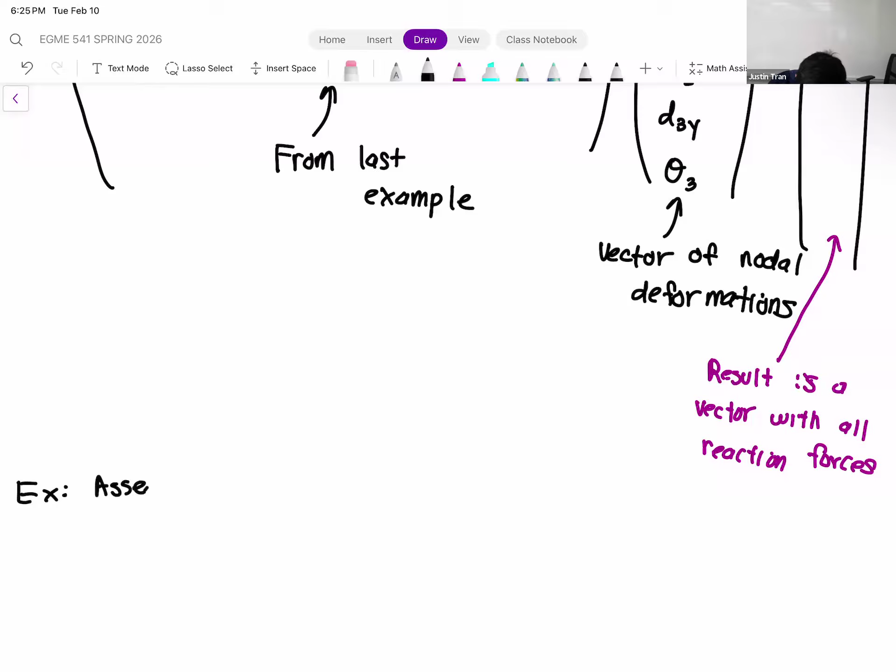So we have an assembly of beam and spring elements here. Just like in the previous problem, let's say we have two beams connected end to end, just like that. So we have element A, element B, node 1, node 2, node 3. Our setup so far is identical to the previous one.

Except at the end here - instead of having a pin support at the end, we're going to say this end is connected to a spring, and that spring is going to be perpendicular to that beam. So this is going to be element C. And then the node that's attached to the ground - we're going to say that spring is fixed to the ground on the bottom node, and that bottom node where that spring is fixed, we'll call that node 4.

All right, so unlike the previous problem, let's put some numbers here. We'll say that the length of both of our beams here are going to be the same - each has a length of 3 meters.

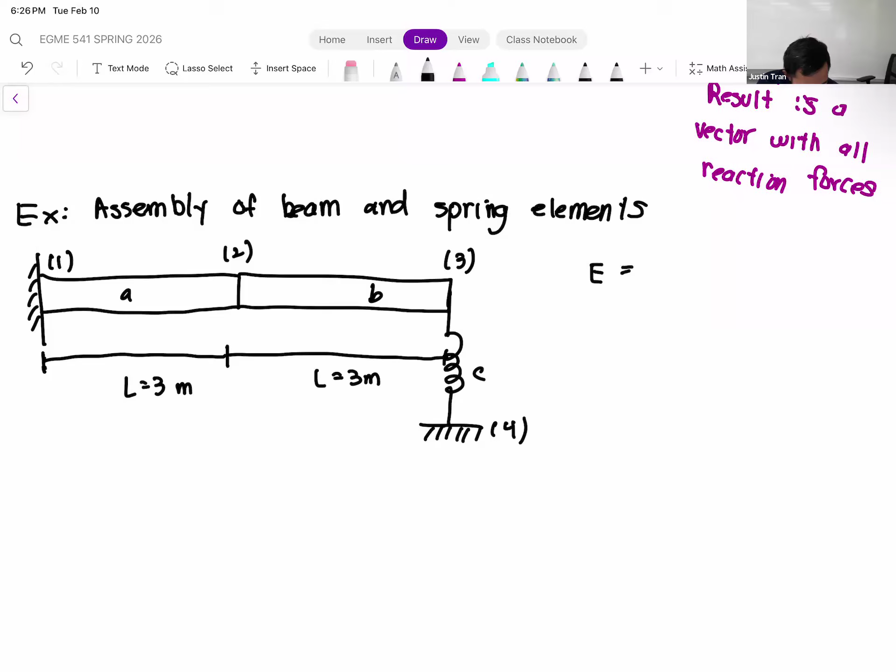We have the material properties for the two beams. The Young's modulus is going to be 210 gigapascal, and our moment of inertia is 2 times 10 to the minus 4 meters to the fourth. These two properties apply to both of the beams.

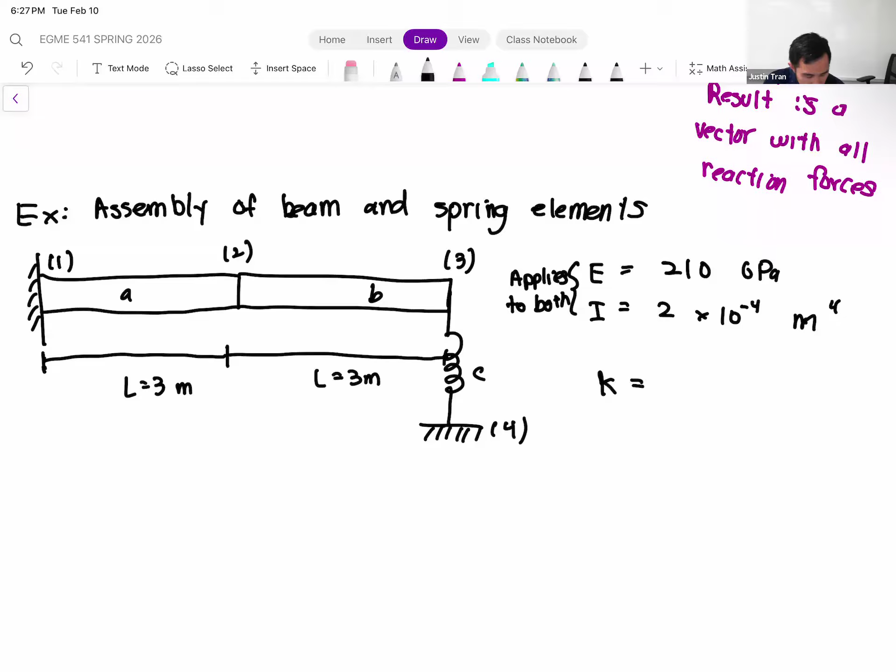And then for our spring, we need a spring constant - it will be 200 kilonewtons per meter. Then we can't forget our force - we have a single force P in this problem, applied downward at node 3, with a magnitude of 50 kilonewtons.

That's 210 gigapascal. 210 gigapascal, yes.

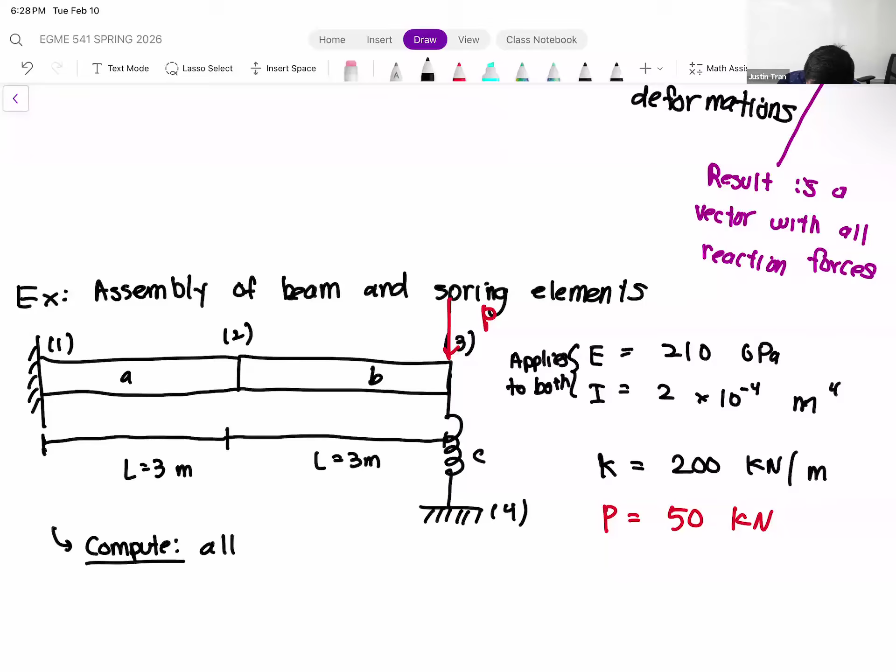So just like we typically do in these problems, let's solve this problem for all the nodal deformations. That's pretty standard - we're going to go through our direct stiffness method or finite element method to do that. But we're also going to compute the reaction forces at every node in the structure as well.

Any questions on this so far? All right, so let's go ahead and get started. First thing to do is we need to compute our nodal deformation, so let's follow our finite element playbook. First we have the element stiffness matrices.

We're going to compute that for both the beam elements as well as the spring. Now the spring here is interesting because technically we have a 2D spring, right - we have a spring that's rotated upwards. But what you're going to see here is that that spring actually aligns perfectly with the transverse deformation of the beam, so we can actually just use our 2x2 element stiffness matrix for that as well.

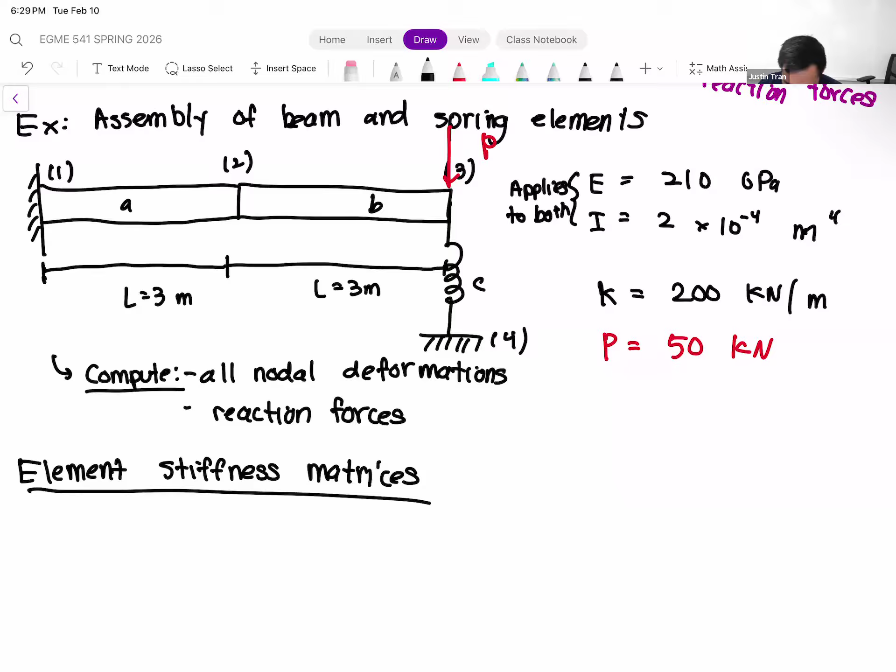So let's go ahead and start with elements A and B. Elements A and B are both beams, they have identical properties, and so the only difference between elements A and B are just their nodes.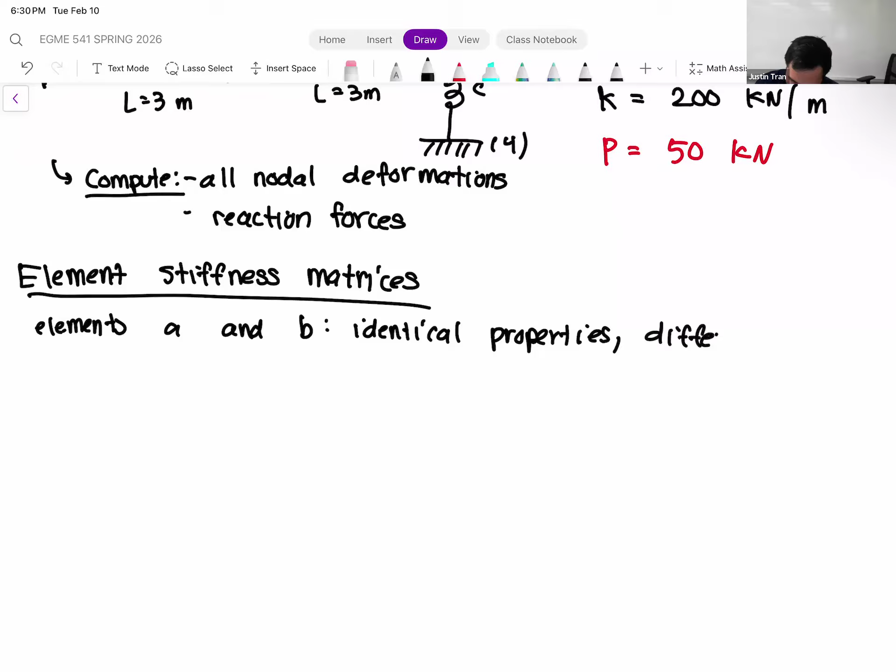All right, so let's go ahead and write this down. It looks like in my notes here, I did not write out the values for this, so I did everything in symbols.

Okay, so for element A, we have EI over L cubed multiplied by: 12, 6L, minus 12, 6L; 6L, 4L squared, minus 6L, 2L squared; minus 12, minus 6L, 12, minus 6L; 6L, 2L squared, minus 6L, 4L squared. And then this, of course, is connected to nodes 1 and 2 for element A. So this is going to be D1y, theta 1, D2y, theta 2.

Okay, for element B, right? And don't be afraid to do this too, especially on the exam. On the exam, you're going to be very strapped for time. And so if you have a situation where you have two elements where their matrices are the same, you can just say, quote, same values as element A.

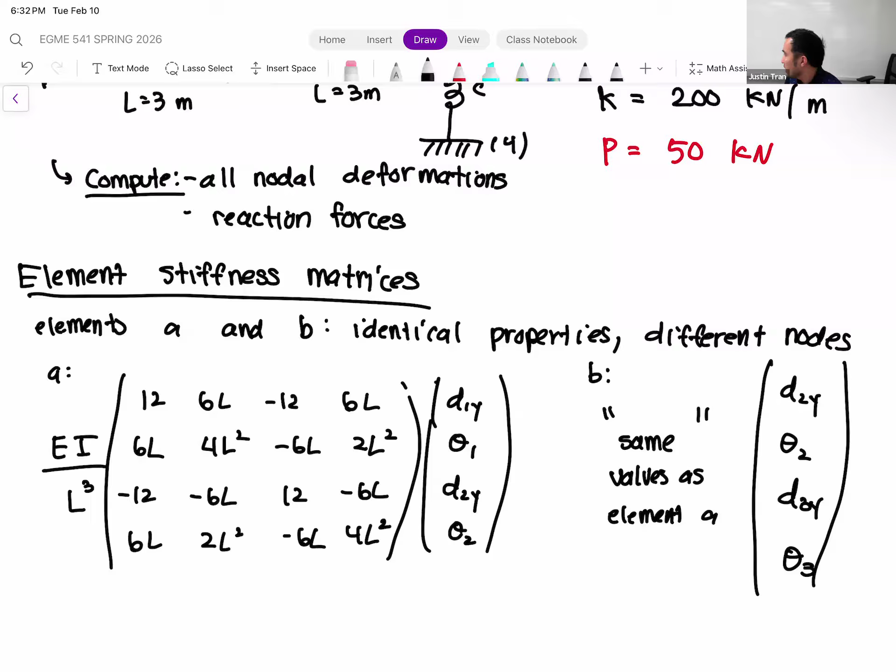Now for the homeworks, I do still recommend that you write out the whole thing, just because on the homework you're not exactly strapped for time. So it's good to kind of write it out, compute everything, plug the numbers in just to make sure that they make sense. But when you're strapped for time, taking an exam or something like that, don't be afraid to do something like this. This is perfectly fine.

All right, and then let's go ahead and do element C now. So element C is our spring.

If you really want to be technical, it's a 2D spring where the angle of rotation here is actually 270 degrees. So you could take that angle, go back to our formula for the element stiffness matrix for a 2D spring, plug that angle in and get all those numbers. Or you can kind of look at the problem and notice something about the direction of that spring. We know from before that springs can only expand and contract, so they're limited to deformations along its axis. It turns out that because the spring here is essentially rotated by 90 degrees...

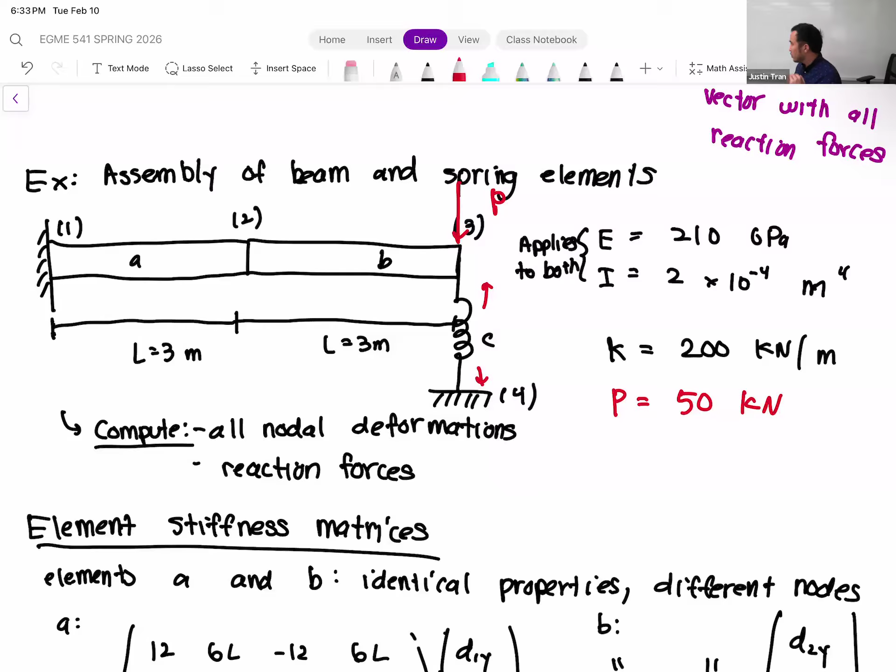The axial deformation of the spring actually aligns perfectly with the transverse deformation of the beams. They're basically 90 degrees from each other. And that works out great, because what that tells us is that we already need to use D1y, D2y, and D3y just from our element stiffness matrices for the beams. But what this tells us is that, because the spring is aligned with the transverse deformation of the beams, there's no need to introduce additional degrees of freedom for the x direction.

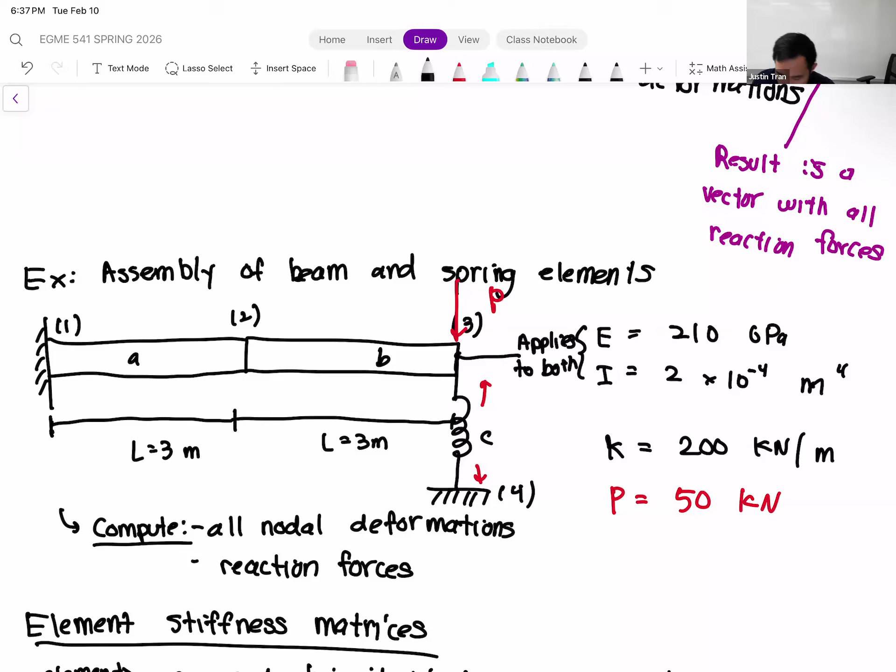So it's 270 here because remember we always start from the lower numbered node and draw our x-axis out that way, and then we rotate counterclockwise from the x-axis in order to get that node or element into that position. Since the lower numbered node is 3, we have to rotate 270 in order to get down there. I think for 270 you end up with the same values as 90 anyway, but it's good to be consistent with how you do it.

Okay, all right, so let's go ahead and move on to the next step, which is assembly.

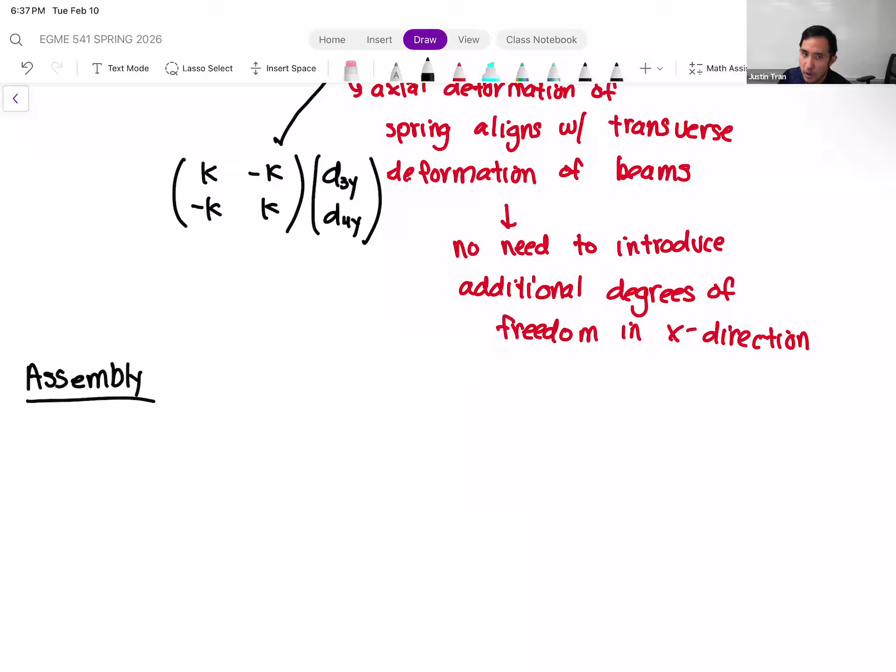This step is mostly the same as the previous example, so I'm just going to write in that matrix. But you have to be careful because this is the first time we're mixing a spring together with a beam, and so how you actually put that into the matrix you have to be a little careful about, because the constants are different. Since the majority of our elements are beams, I am going to put the beam constant out in front, so that's EI over L cubed.

Let me go ahead and write in our degrees of freedom here. This is actually the first time we're going to have an odd number of degrees of freedom. So we're going to have D1y, theta 1, D2y, theta 2, D3y, theta 3. We need D4y because that's where the spring is connected to. Now we don't need theta 4, because there's no beam connected to node 4 — node 4 only has a spring attached, so there's no reason to put theta 4 there. We're going to end up eliminating it from our equation anyway, so I'm going to stop the system at D4y.

D1y, theta 1, D2y, theta 2, D3y, theta 3, D4y, all of this is equal to F1y, M1, F2y, M2, F3y, M3, F4y.

Next we have element B. Element B is also a beam, but it's connected to nodes 2 and 3, so that's going to be this region right here.

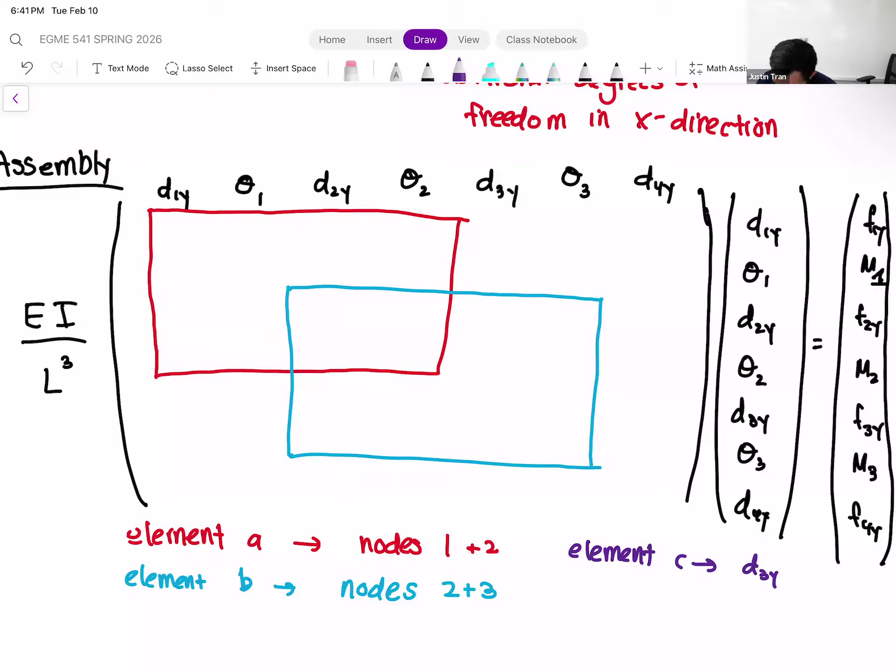Then we come to element C. You have to be careful here because remember, the spring does not support any rotational components. So element C is connected to only 2 degrees of freedom, which is D3y and D4y. You want to be careful and don't include the row and column for theta 3.

Let's go ahead and box those entries in. So we have the D3y column and the D3y row. Next we have this entry right here, which is the D3y row and the D4y column. And then we have that one there, which is the D3y column, D4y row. Finally, in the bottom right corner, that's the D4y entry.

Let's go ahead and just fill in the rest with zeros for all the entries that we don't need.

Oh, I was like, why is this not symmetric? I need an extra row there. Okay, that's true for a second. Missing a zero next to D2y. You're probably right, let's see. Oh yes, right here, thank you. Yeah, the odd number of entries is kind of tripping me out.